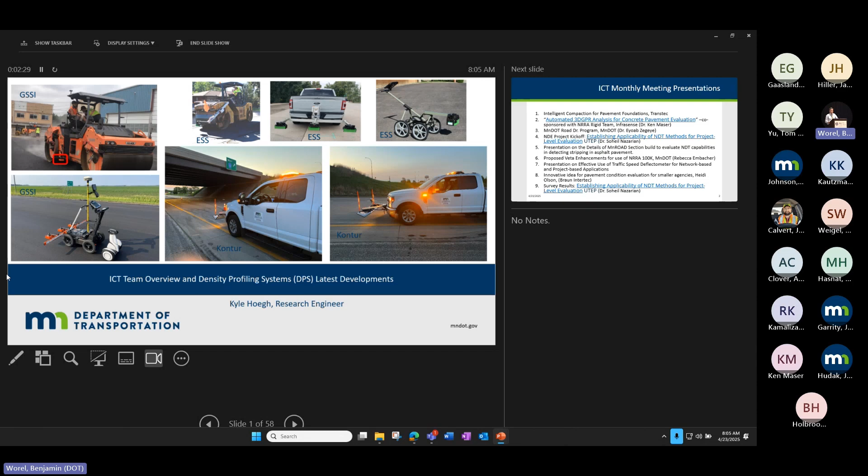So I'm going to talk a little bit about what you see on the lower right, which is we got out on the first project this year, the Kontur 3D DPS, as we're calling it. And then in the upper left, and also in the upper middle, you see that we're starting to get this DPS going on roller mounted systems. So just going to briefly touch on some of these developments.

I did want to mention that these are some of the presentations that we've done as part of our monthly meetings, and also really appreciate that we're starting to do those joint quarterly meetings, because I think that's what's important for our ICT group, is making sure the larger paving audience is aware of what the latest and greatest is. So appreciate the NRRA for allowing us to do that.

One project I wanted to highlight here was with the use of this new 3D Kontur DPS, and it's the same system, the 3D radar system that's used for a lot of other applications, but the manufacturer has got it to the point where we can actually use it to directly map the relative density on projects.

So there was a really good candidate here where it was night paving. It was a big project, and the only way we could get DPS data was using this system as compared to the cart-based system that we typically put out on projects. And it was a big project.

The other thing here is, I don't know if it was Dave Van Deusen's fault, or probably. Okay, we decided we were going to go no vibratory roller compaction, and we're going to waive any disincentives and expect to get a good product out there. So I don't know, but no, I'm kidding. So that is true, but we did it for a reason, because of the conditions out there, which I won't go into the details now. You can talk to Dave about that.

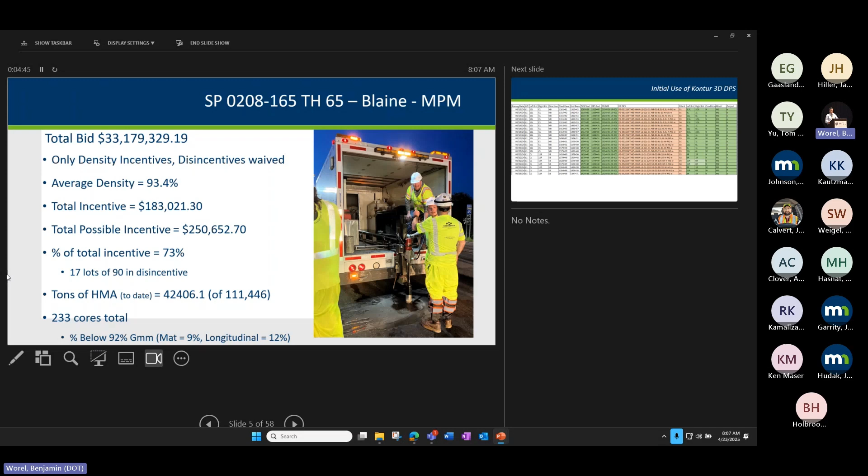Because of that, we wanted to have some sort of assurance that beyond just the cores we were using for incentive, that we were getting consistency out there. So that's kind of where we pulled in the DPS as a quality management tool.

Just briefly, it's really important with DPS in general, and especially on projects like this, the keeping track of where you're collecting. So in this case, we basically just went out there and did a pass on the left side of the road, and then on the right side of the road, and that gave us a map with the 3D DPS.

So the main thing we tried to do with this was to identify inconsistent areas, try to figure out where the anomalies are. And to my surprise, there really wasn't. It was a really, really consistent project. So I guess maybe Dave knows what he's doing.

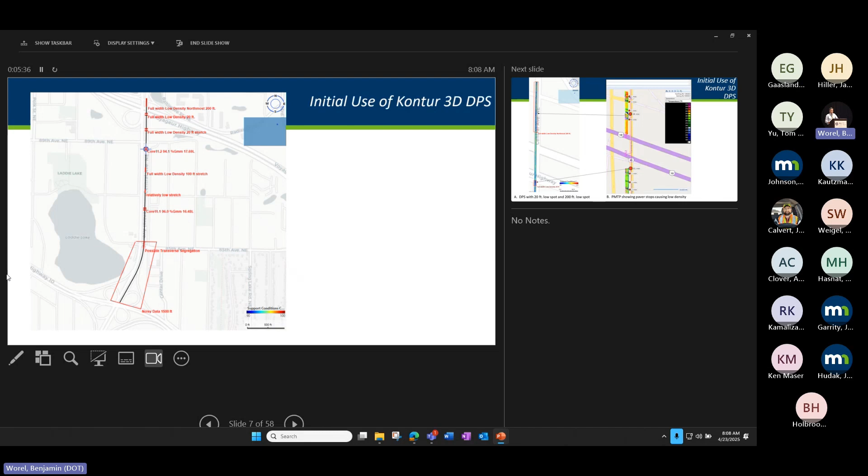But we did want to investigate some of these areas where we did see some anomalies with the DPS. So what you see on the left there is the 3D radar map, where when it turns blue up there, that means we're seeing a little bit of a dip in density. But we also had other ICT technology out there that we could confirm there was actually a construction reason for that inconsistency. So in this case, that actually gave us a little bit of confidence in this.

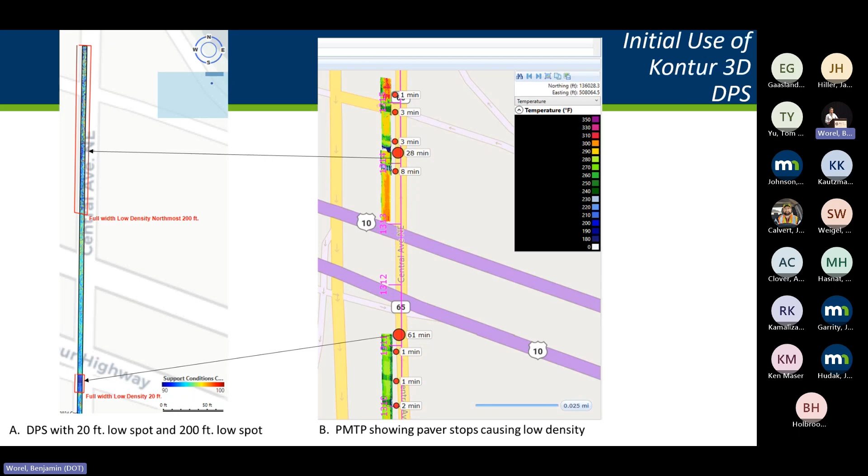Looking at the very few inconsistencies we did have, and comparing it with the other ICT, what we were seeing is whenever we had a low spot or inconsistency on this project, it was typically caused by them having to pull the paver and go do some turn lanes or things of that nature. So we gave that feedback to the contractor.

But the big story here was, despite no vibratory roller compacting and no disincentive for the contractor, they did a really, really good job. I think part of that was we specified 3 pneumatic rollers on the project. Is that right, Dave? Greg says yes. So whatever they were doing out there worked out really well.

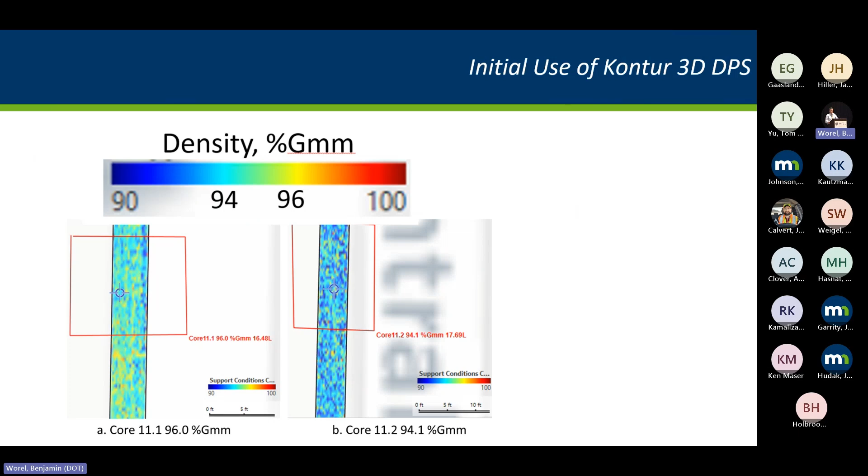This is an example, lower area, and they're still hitting 94% GMM. The good news here is, with just cores, we wouldn't have really known if it was a consistent project or not, even though we were doing some non-standard things. So it was good to get that out there.

This is a comparison of 3D DPS with our more conventional 9 passes that we do with 9 sensor passes, with 3 cart passes with our cart-based system. You can see here, this is just the center line, so this is 2 lanes where you see the drop in density on the unconfined side. It's really showing the same picture, just maybe a little bit higher definition on the left there with sensors every 3 inches instead of every foot and a half.

One of the good steps we've taken is you can take this distribution and get a lot of information out of it. Because we know air has a dielectric constant of 1, and that's not going to change no matter what project you're on, we've come up with a consistency measure where we can set a threshold for how much of a drop in density we're willing to handle on these 150-foot sublots, and use that as a means of trying to go beyond these cores every 500 tons or so, giving us more confidence in the product we're putting out there.

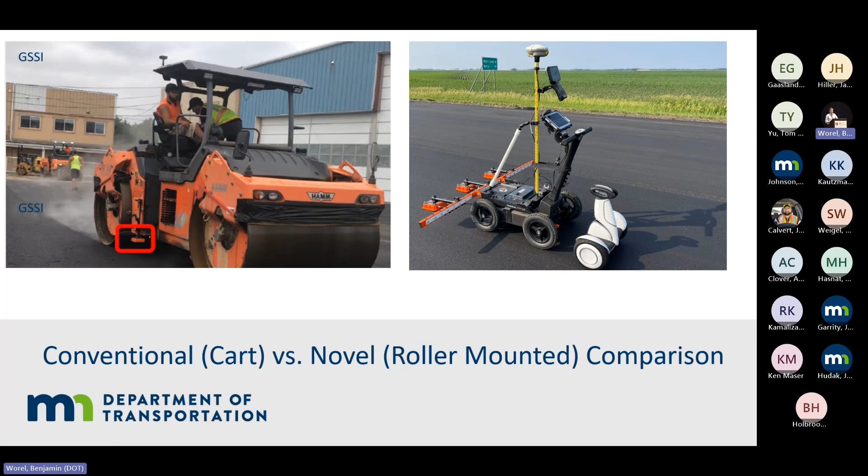I wanted to briefly touch on another recent development, getting the DPS sensor on the roller compactor, because it's great to have quality assurance after the fact, but if we can start to use this as a quality control tool, we can start to build it right in the first place. We started to look at this, and the initial results look good, comparing the cart sublots with the variability measure to the DPS on the roller compactor. You see a similar trend, which is good to see, and we're going to test that out more.

Which is good timing, because now we've just kicked off our phase two DPS pooled fund. We have 16 agencies, and we're going to tackle this. It was mostly research in the first phase, but now we're really going to go heavy on the implementations, where participating states will get this technology out there and see if we can improve on our current state of the practice for evaluating density.

With that, if I can advance to the next slide, I'll take any questions before we bring up Soheil.

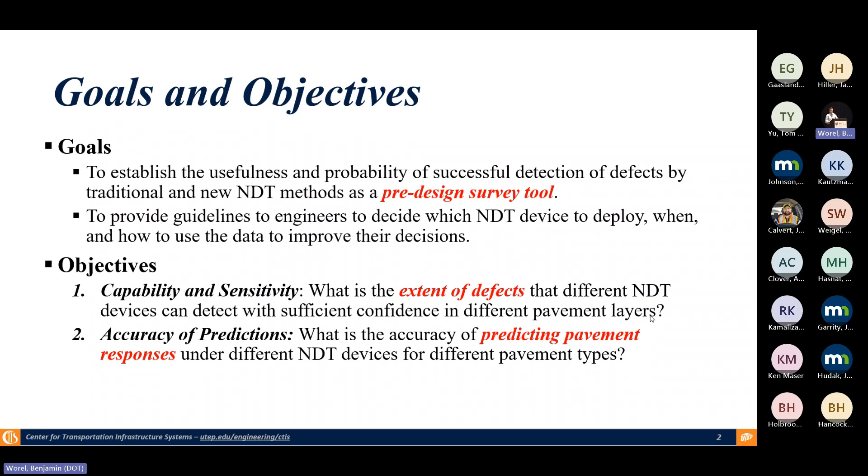Anyway, so I'm going to go Federal Express type of guy from now on because of the time limitation. I don't know what happened, but everything I pushed, it just goes back and wakes those guys up. Here we go, okay.

So the process that we're just trying to do is basically figure out what are the damage modes of interest to the community, what are the most prevalent problems you have. What's the deterioration process, just to see what happens and when it happens, before you start getting alligator cracking on the surface. How can we measure these deterioration indicators and how can we monitor the pavement to see when these are happening. So essentially we just try to catch the problem as soon as we can, so the device is helping us, not after we already see it on the ground.

Okay, so I'll go very quickly. You select the damage mode of interest. Here I'm just going to go with fatigue cracking because it's easy, everybody is designing for it. We can use any equation that you use. We chose to go with the 1-37A equations, MEPDG, Pavement ME equations, and look at it carefully to see what parameters you have.

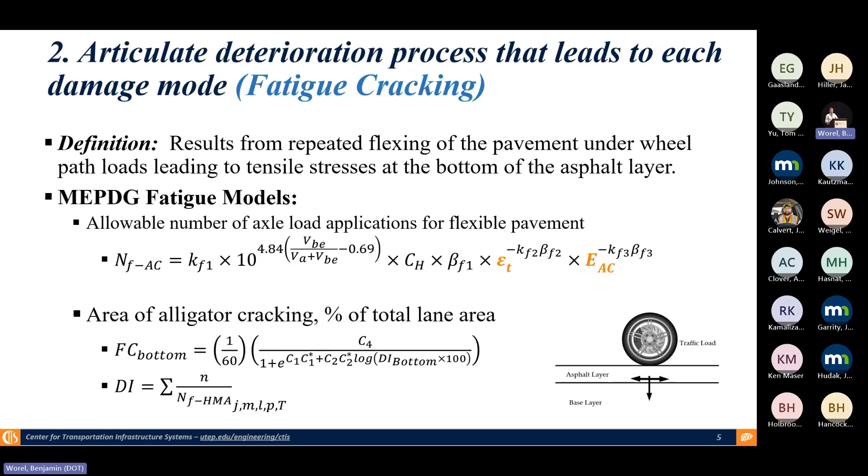See how these parameters affect the equation. There are a bunch of factors that we don't touch. One thing you have to do is have the effective air voids and the AC content, which you can get in the laboratory or with a core. There are two things we have to model: the tensile strain and the damage index in the equation. And there are only two things you have to measure: the thickness of the layers and the moduli of the layers.

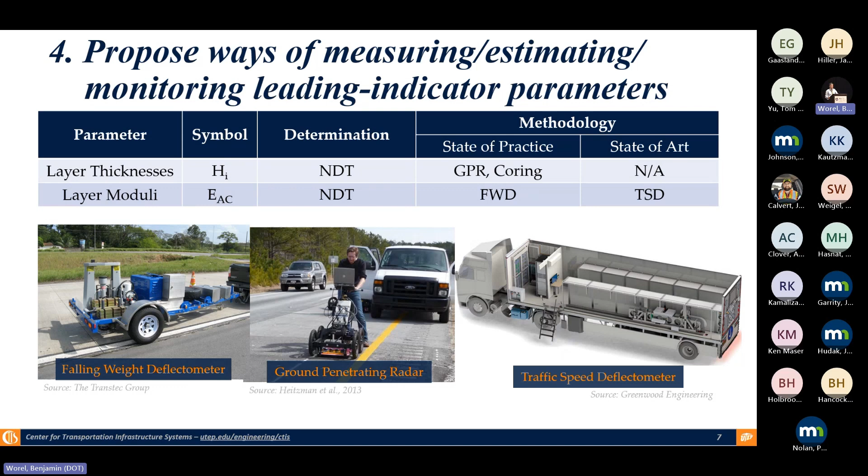So how are we going to do that? To simplify it at this moment, to get the thickness, the state of the practice is GPR or coring, and we're not aware of any state of the art coming in that area that we don't have. But for the layer moduli, the state of the practice is FWD, and the state of the art is TSD, the traffic speed deflectometer. So we go through a sensitivity analysis, a Monte Carlo simulation, and something called the impact chart to see what parameter is most sensitive in your design, what affects your design the most. Let's focus on that. If the thickness of the base doesn't impact your results, don't worry about it. But the thickness of the asphalt maybe does.

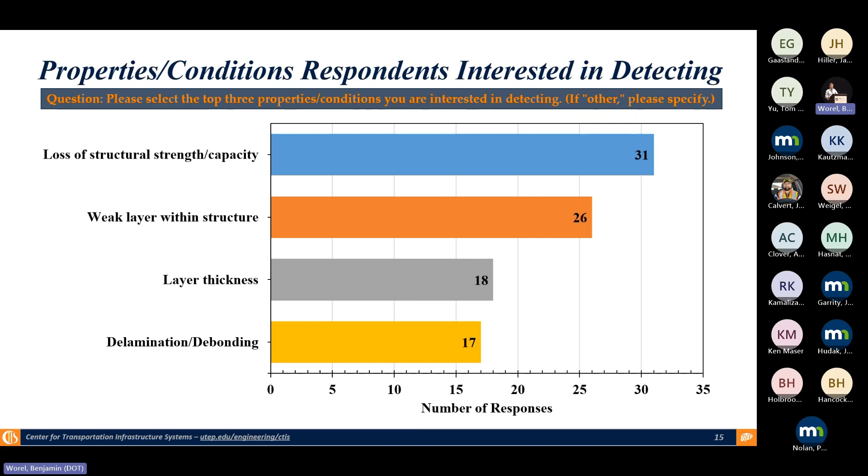So we're focusing on those properties and conditions: detecting the loss of support in the pavement, finding the weak layer, the layer thicknesses, and delamination debonding. Those were the characteristics we focused on. I'll skip some of this since it's for a 30-minute discussion. We're right now developing a test plan to go with those three devices and the four defects, and hopefully next time we'll give you some advice.

Okay, let me do the special slide. Just a question: how many of the audience know what the traffic speed deflectometer is? I'm hoping all the hands are up. So this is essentially what EOP showed yesterday—it's a device that goes at traffic speed and collects deflection parameters from the ground.

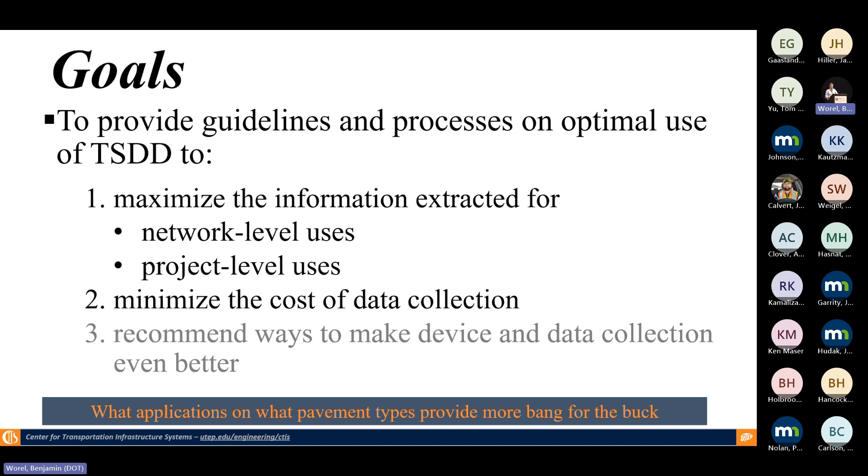So we are trying to maximize the information extracted, both at the network level and the project level. Right now, it's predominantly network level. We are hoping to get into the project level and minimize the cost of data collection, and give some recommendations to the developers of the TSD on how we can reconfigure the device, improve the accuracy, and do the other things we would like to do that we cannot do right now. So the focus is between the TSD capabilities and our desire for what we are trying to do with it.

So we found four uses for this device. The first one is essentially we do statistics. You just run the device and see what the anomaly is. It basically gives you a parameter, you do statistics and say this is bad, this is good. That's great for network level.

The other one is the overall pavement capacity. That's when they come up with some indices from the parameters they're measuring, and then correlate those indices to different things. This one is mostly spatial and temporal data - if you have several years, you can start working with it.

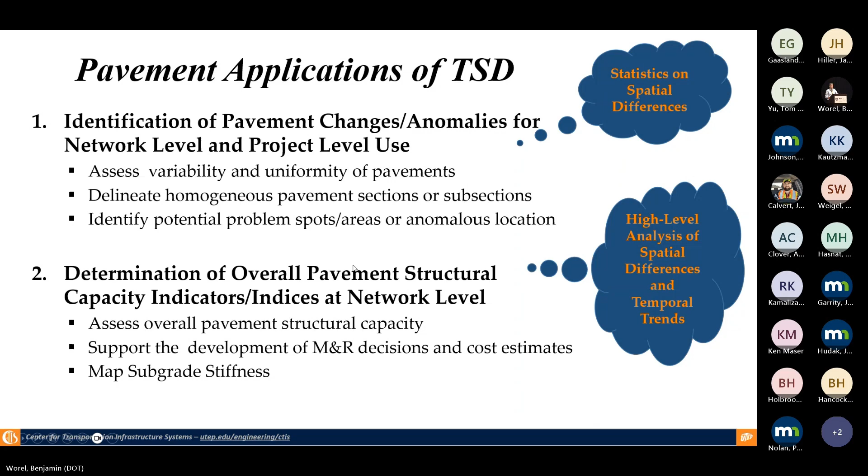And the third one is the project level. We just started touching it at the project level, trying to do structural capacity - that's where the pavement engineering comes in. Before it was mostly statistics and indices. Then load transfer efficiency, something that came up recently for rigid pavements. Our goal is to see if you can use it for other things besides finding if the joints are bad or good.

So to do these four things, we have certain parameters to look at from an accuracy standpoint. If you just want to see good and bad, you don't really need an accurate measurement - you need a precise measurement. But if you're trying to do project level, you need extremely high accuracy and precision. There are 10 criteria we are looking at, and we map it onto each of the four applications.

Again, a survey - basically what we see is that network level use is prevalent, project level 17 percent says both, but there is very limited use, though it's there and coming. Main interest, I don't know, fascination with delamination and debonding - I guess that's what we see all the time - joint condition in concrete, weak layers within the structure, and loss of structural capacity. You see there's similarity between this and the previous one - they're the same, just different groups saying the same thing.

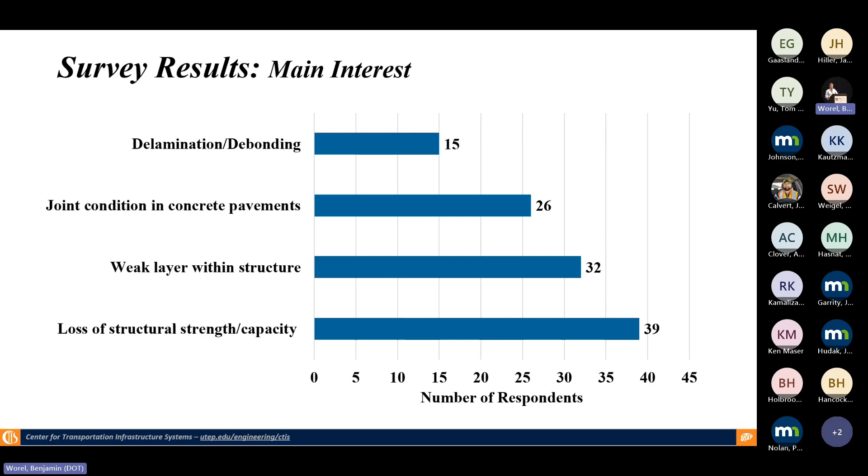The gap analysis, based on the survey that we got, we did the gap analysis, and it's based on three things: data collection and processing, network level application, and project level application. What are the gaps in these three groups? I had nice slides, but I'm not going to show them to you.

Okay, there are some caveats - I'll show you a little bit. These are not our opinion, these are your opinion. We are just, I guess, some people started shooting at the piano player - I'm the piano player, I'm just summarizing what the DOT said. Some of these are gaps because it's a new technology, and any new technology takes forever. There is a lot of intense research, a lot of experience, and then there are some problems common to all NDTs - it's not unique to this one. Nevertheless, we started doing a SWOT analysis, and I see we are running out of time.

So essentially the strength is that you can collect a lot of data - now we collect data at 50 millimeter, 2-inch resolution. And you don't need traffic control.

The opportunity is to reconfigure the sensors and things like that, so you can get more precise data on stiffer pavements, which is a weakness at this moment - as the pavement gets stiffer, there is less precision and more noise in the data, and we need to figure out how we can improve that.

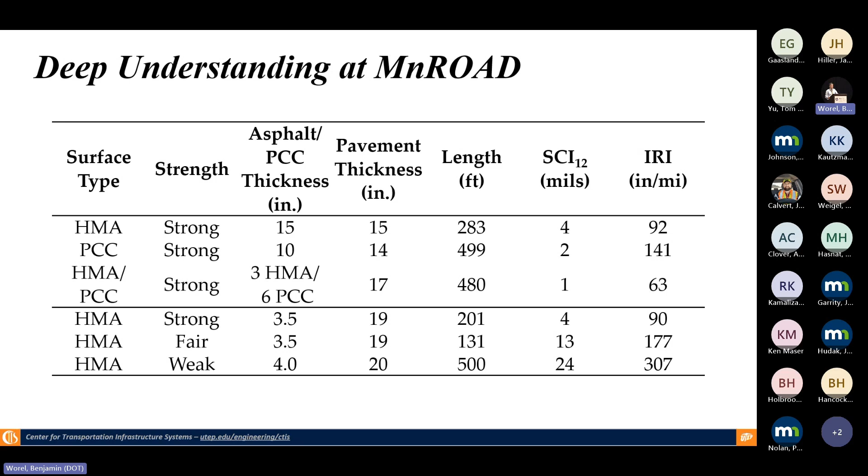So we call these six sites that start from the softest HMA all the way to very stout, rigid pavement. We have the signature of what the truck measurement would look like, and we are using those to deeply study all the issues we are considering, and that people are interested in.

So this is an example. We have sensors embedded in the concrete, and we just look at the measurement of the TSD and the sensors. This is a weak one, and the data is good. If I show you a stiff one, it may not look as good as this one.

And then we use the rest of the test sections to validate what we found from the deep ones, because there are different thicknesses, different configurations, different levels of distress, and so on and so forth.

We are lucky enough to have data from 2019, 2021, and 2025, so we got vertical coverage. We can see the progression of the deterioration on the sections that have been there.

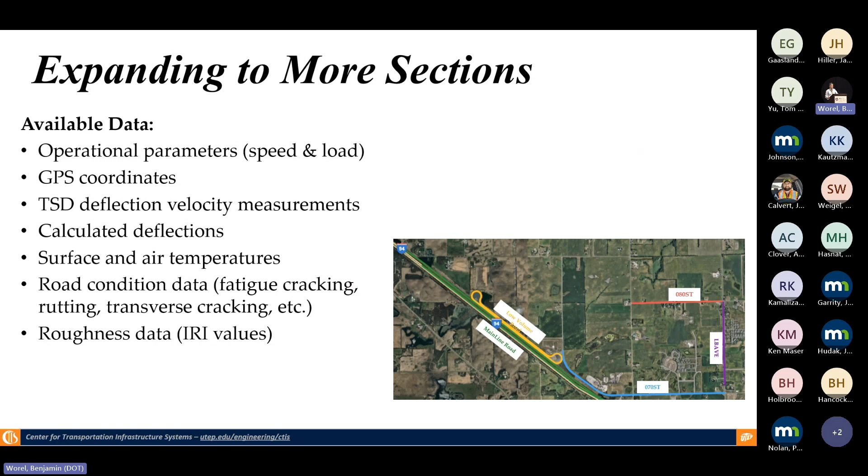We did some consideration of the different parameters, how they impact the measurements that you do. You see that the thickness of the base, for instance, is not the big deal. For the AC, you may want to run your GPR and get a good indication of the thickness. The GPR is integrated in the TSD.

For pavement, the moduli of the different layers - the sensors close to the tire are sensitive, the base as well, and then the subgrade modulus is the strongest indication. So you get a very good indication of the subgrade modulus. If you want to see what the subgrade is, you get good information, but not as good for the other layers.

We finally looked at 46 indices that people have used in the last 10 years for this, and these are the top five for each one of them. The criteria we have for the best one is just a very strong correlation to one parameter - deterioration of asphalt, base, or subgrade - and not being impacted by the other parameters when we do it.

And again, this would be 30 minutes by itself, right?

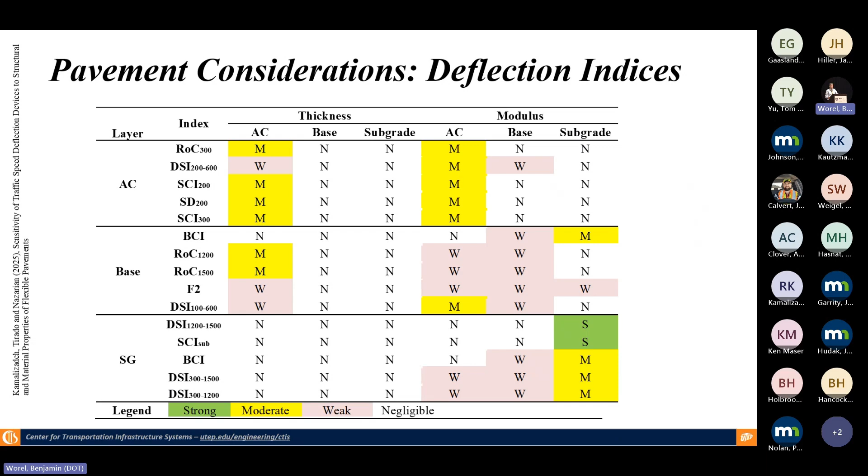Right now our highest priority is the network level - how to manage the variability and how to interpret the data so that you get the best information. The second priority is the project level, and then the third goal is statistics, which we are not going to touch. The last one is just basically something we're going to run out of time before we get to it.

So, with that, I'm done. Sorry if I ran long.

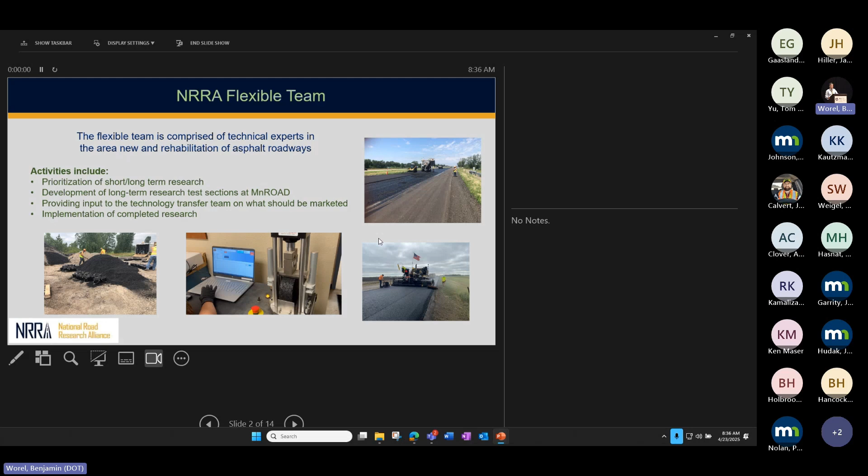Time - yeah, we are fortunate enough, we have three periods, every two to three years. That actually deterioration model needs time, and you want to make sure that it's consistent. So you know, if the pavement is deteriorating quicker, you want to get more replacement, so you want to make sure that you're accurate.

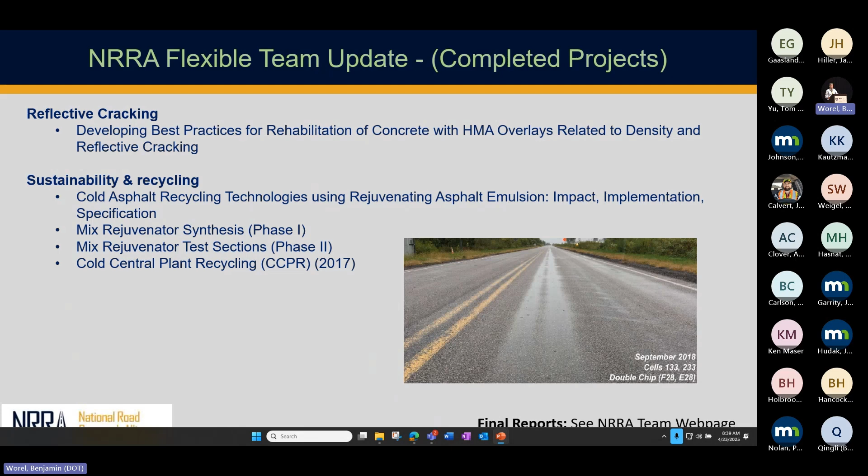We have about 25 projects now on our website, all under the 4 categories I have here. Within those 25, we have about 10 completed projects, and also a couple of projects that were completed but extended, since they both had test sections we wanted to continue evaluating for performance. We also co-sponsor research projects with other teams like preventative maintenance and ICT, and we have exclusively flexible projects too. So we have about 7 ongoing projects in different progression of completion, and also a couple that are in the development stage now and RFP stage.

One of the things we did this last year was there was some available funding, $100,000 per team. It was left up to the teams how they wanted to have some latitude in how to solicit proposals for them.

So the Flexible team took a similar approach to the call for innovation we had a couple of years ago. If we recall, we actually solicited needs from the agencies, and once we got the needs, we forwarded them to the associate members, and then they come up with proposals.

But in this case, we sort of skipped that first step, and just solicited all the members for proposals. Once we got the proposals in, we sent them out to the voting members of the agencies and asked them to pick the top 3. Once we got all that information in, we submitted to the executive committee. In the end, we had 14 proposals submitted, flexible team proposals.

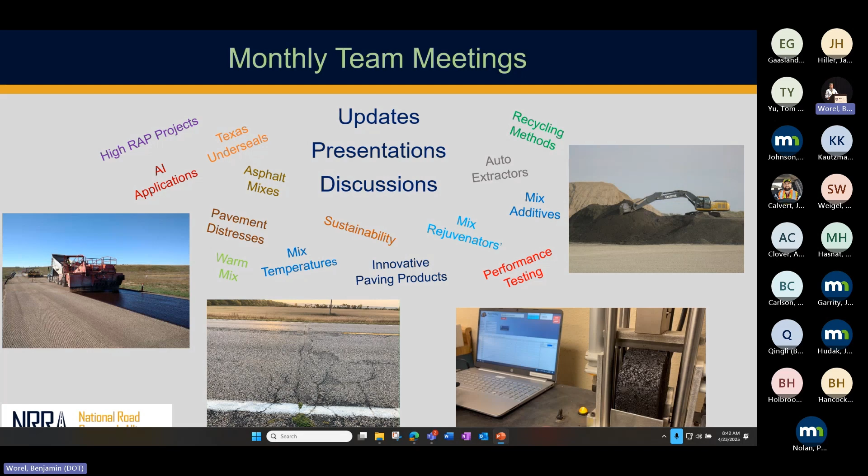In the not too distant future, we're going to have tools for overlay, for reflective cracking, so we can figure out what mixes and additives to use to resist reflective cracking and thermal cracking, guides for perpetual pavement design and construction, and balanced mix design, which runs through the whole thing here.

It kind of relates to everything we're doing, and being able to account for the aging of the mix and the warm mix technologies, recycling agents, having a guide for recycling agents and rejuvenators, being able to figure out how much effective binder we have in the RAP, and cold asphalt technologies, ways to make our joints and rumble strips more durable and better milling capabilities. So we've got a lot of stuff we can take back because it's all directly related to the agencies, all this research.

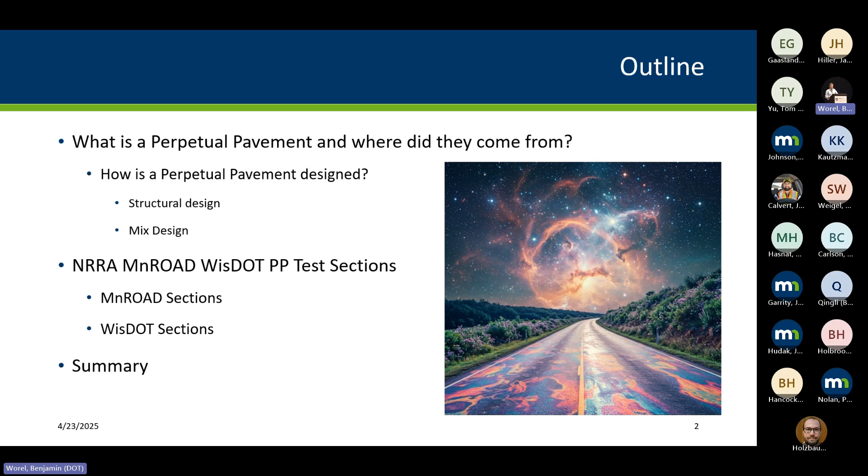So in general, what is perpetual pavement? This isn't a new concept. There's been kind of full depth or deep strength asphalts for a long time. And then going through the literature, you start to see the term perpetual pavement start to appear in the early 90s.

Especially for us here in Minnesota, you can't really talk about perpetual pavements, and even nationally in the US as well, without mentioning Dr. Newcomb and his work here at the University of Minnesota, and then as he moved on with NAPA and then TTI. But again, his first paper from 2001, the first line is, the concept is not anything new.

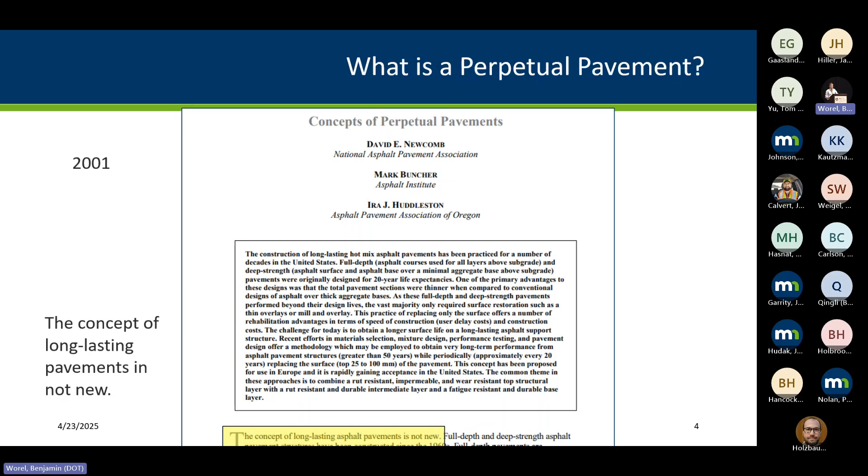So digging a little deeper into some of Dave's work, it really is designed and built to last 50 years with only a slight maintenance every 20 years from the surface itself. And this is accomplished in multiple aspects of the project, being material selection, mix design, structural design, and performance testing.

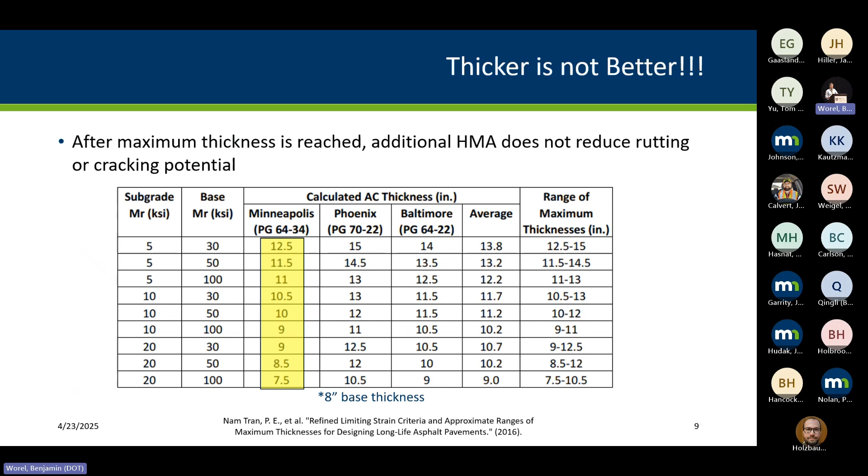Additional to that, there is a cap on the upper limit of kind of asphalt pavement or thicknesses that you need. Once we get thicker than this, you're really not getting a benefit. I want to point out these thicknesses, especially for the Minneapolis region. It goes anywhere from 7.5 inches of asphalt to 12.5 inches, and you'll see how that kind of plays into the sections that we built.

So the sections that we built in 2022 with our MnROAD mainline reconstruction, we built 2 perpetual pavement sections at MnROAD.

The following fall, we built 2 more perpetual sections, or instrumented 2 sections that WisDOT built on I-94 in Osseo, Wisconsin, about 2 hours east of here, just under 2 hours. It's close enough that we can go with our MnROAD team and do regular monitoring and data collection there, and it's also the same stream of traffic with those sections. So we have the same instrumentation in different structures in different states, and our MnROAD team is collecting the data.

The MnROAD section has 8.5 inches total asphalt over 9.5 inches of base. The other sections that we built at MnROAD that year, that Ishan talked about yesterday, are 6 inches of asphalt over 12 inches of base. So all we did in the design here was change from 6 inches to 8.5 inches and then trimmed the base up a little bit, giving us a nice thickness comparison between those sections.

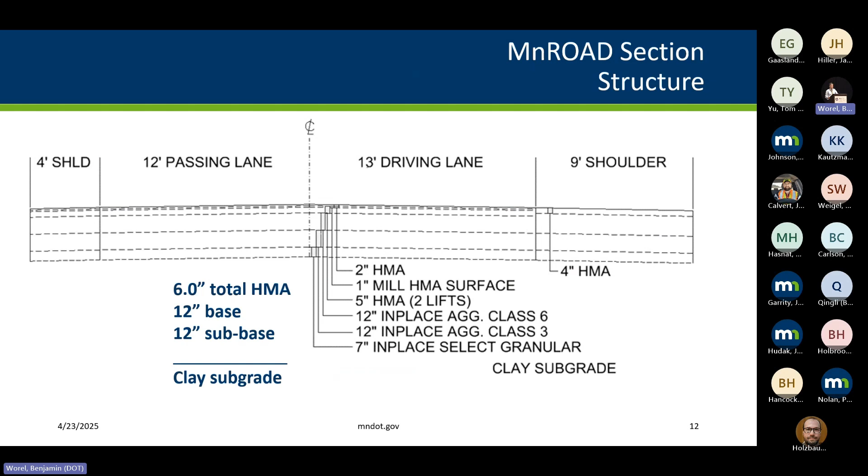On individual mixes selected, I won't get too much detail for the sake of time, but the general concept is a high quality surface. We used an ultra-thin bonded wearing course for the MnROAD sections. For the stiffer layer, we increased the RAP content on that middle lift, and on the bottom layer we added 0.5% extra binder to give us a little extra flexibility. All of these tweaks were done within the contract, within the special provisions themselves, and we didn't get any pushback from CS McCrossin, the mix designer or the contractor, on making these small additional RAP tweaks or additional asphalt contents.

It's not going to be a perpetual pavement if it's not constructed properly. We really have to emphasize the importance of using all the tools that we do for construction, because with a perpetual pavement you need it to last a lot longer, so any little flaw is going to be amplified over time. You've got to get it right the first time, so construction quality is very important.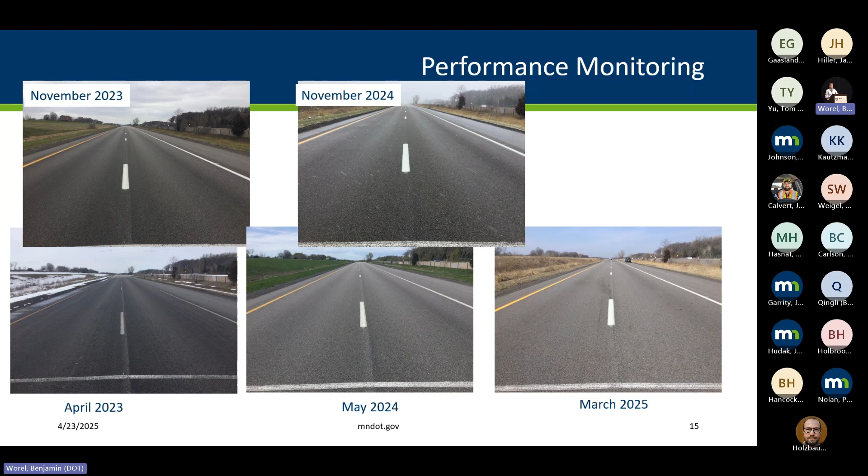Our routine performance monitoring, you've seen a lot of shots and images and distress surveys from MnROAD. The takeaway of this slide is we're looking at the same thing over and over and watching as distress progresses over time in these sections.

We're also monitoring structural performance at MnROAD with the FWD and then with the dynamic sensors, which I'll show here. So we have strain gauges and pressure plates, same layout for the Wisconsin sections, where we have strain gauges in both the longitudinal and transverse direction with traffic, and then pressure plates on either side. The pressure plates are located at the top of the base as well as the top of the subgrade, and these long vertical pipes going down are our thermocouples, which measure our temperature.

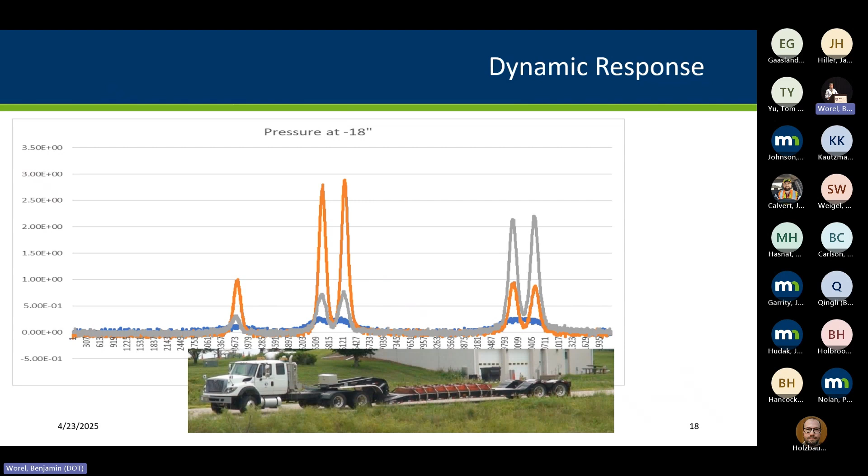Here's an example of what we're seeing: this is 3 pressure plates all laid on top of each other. You can see the furthest one inside was that blue line on the bottom, not a lot of response. The gray is the next one inside, and then the truck is directly over the orange spikes that you see.

One of the cool things about the MnROAD section is the collaboration we did with the PM team on the wicking geotextile. From a perpetual pavement standpoint, this project really means we got extra environmental monitoring of the conditions, more in-depth analysis of the structure. It's the same structure I was showing earlier, with 8.5 inches of asphalt, but the big difference here is now we have a geotextile fabric at the bottom, plus some work in the shoulders to tie in the fabrics.

This is what the geotextile fabric looked like. The cool part for me is the additional moisture testing: they put geotextile fabric in half the section and no fabric in the other half, where our dynamic instrumentation is. We have moisture sensors going all the way across the pavement above and below this geotextile fabric, and in the control section we also have moisture sensors going all the way shoulder to shoulder across the pavement.

Moving to the WisDOT section. These were constructed in fall of 2023. I believe, Sinan, the whole idea of the perpetual pavement NRRA section came from someone at WisDOT who saw we're building 12 inches of asphalt here on a bridge approach. We should use this opportunity to look at the response under 12 inches and update our perpetual pavement or deep strength design strategies. So kudos to WisDOT for initiating this project.

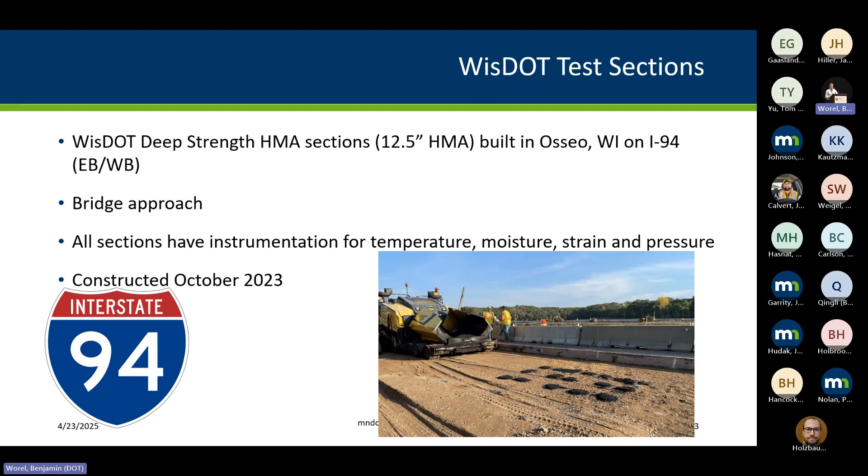It was really nice working with Sinan, Mohammadhossein, Pete Kemp, the whole WisDOT team, collaborating with them. Here's Pete in this picture, taking a picture of somebody taking a picture of Sinan and I working. Really good, unique collaboration that we were able to do with WisDOT, and we're looking forward to getting the results.

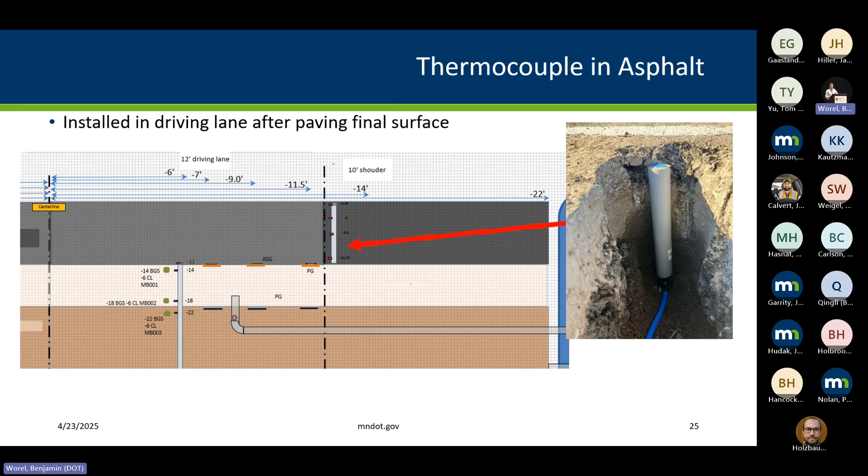So this is a cross section of the thermocouple we installed, right after the surface lift of the pavement. We core in through the asphalt and then put in our temperature tree that's measuring. Really what we're focused on is the top of the asphalt, the middle of the asphalt, and the bottom of the asphalt, so we get a temperature profile for our dynamic responses.

Wrapping it up, perpetual pavements are a tool, especially as we focus on longer lasting or more environmentally friendly mixes. I really want to stress not to lose sight of the overall performance. What might take a little more money in design or embodied carbon in design and construction can pay off if we're able to make longer performing, longer lasting pavements. With the little exercise we did here at MnROAD, we changed 2.5 inches of base and changed the design life from 20 years to 50 years, being a perpetual pavement.

Like all of our projects, it really is a full team at MnROAD to get all of this done. I've already mentioned a lot of the Wisconsin team - I think I owe Pete some cheeseburgers that he bought for us during the construction day - and then great contractors on either side being able to work through this project.

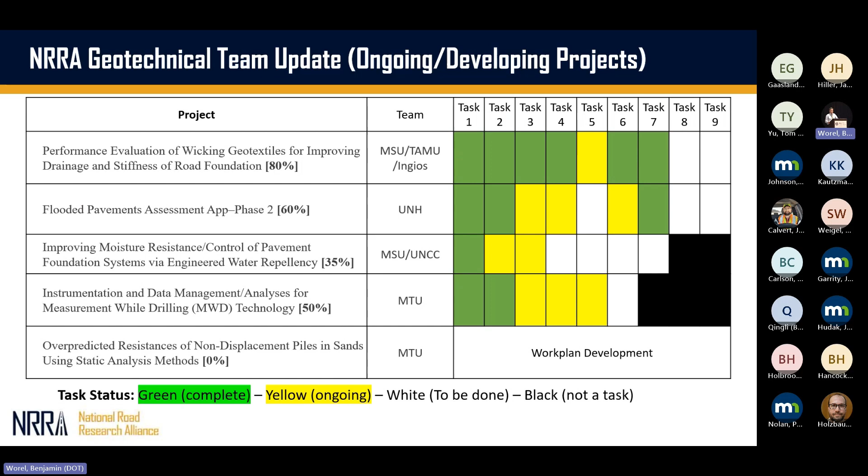I really like how the membership of the team is moving towards other topics that are non-traditional - related to geotech assets that are still part of the right-of-way, but not always just sub-base and foundational layers. We are starting to branch out into other assets within the realm of the geotechnical engineer that are still part of the right-of-way. I really appreciate our members pushing in that direction.

And then other activities and collaborations I want to highlight - Ben has been asking us for months about the additional benefits. So I listed some of the unquantified benefits not directly tied to projects. Our members realize there is a lot of expertise in our team, and our members are very cool and friendly, always open to help. I've listed some of those here.

We recently assisted North Dakota DOT as a team in the implementation of LWD for quality assurance. We are helping them navigate that implementation process. Terry has been using this team for years to inform and help him make decisions for changing specs.

The most recent one, he wanted to know what other states have in terms of specification for the Los Angeles abrasion test. Currently we have a lot of issues with environmental aspects in terms of resource availability for aggregates. We're having a hard time finding good quality aggregates across the metro area. So we're starting to brainstorm the idea of maybe reducing some of the high standards we used to have for some tests to accommodate that issue, trying to be open-minded about using less quality aggregates. That's one of the things we're using memberships to get information on.

Another one was assisting interpretation of intelligent compaction on pavement foundations for Illinois Tollway. It can be very complicated, as was mentioned during the ICT team meeting presentation. Getting that information could be overwhelming, and interpretation of the data could be very difficult. So the team is trying to help inform practitioners on the use of IC technology for pavement foundations.

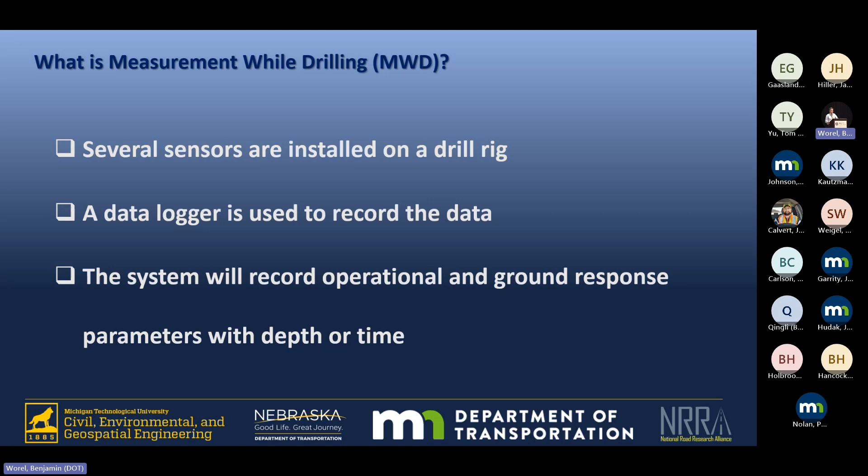We put the sensors, and obviously we need a data logger to record the data, and then the system of sensors and data logger is used to record operational and ground response parameters with depth, or time, or both. So that's the whole concept of measurement while drilling, or MWD.

But what is the goal of measurement while drilling? Broadly speaking, we have two major goals that we hope to get from all these measurements. The two major ones are to optimize the drilling operation itself.

When you're drilling into the ground, you have a certain rotation speed, and you're putting a certain pressure on the drill bit to push it into the ground while it's rotating. Using the data we collect while drilling, we hope to be able to optimize that drilling and do the same drilling with the minimum energy used.

And it's not just about the energy. If you drill with an optimized method, you could also reduce the wear and tear of your equipment, your augers, your drill bits, and everything. So that's one of the major goals of these MWD projects.

And the second one is to improve the subsurface characterization, or site investigation. Right now, while we're drilling, the common practice is that as you're drilling into the ground, the soil comes up, so you could use that soil to identify the different layers in the ground. But that's pretty much all you can do with the soil that comes up, because that soil is disturbed. The same soil could have different properties depending on the state it has in the ground.

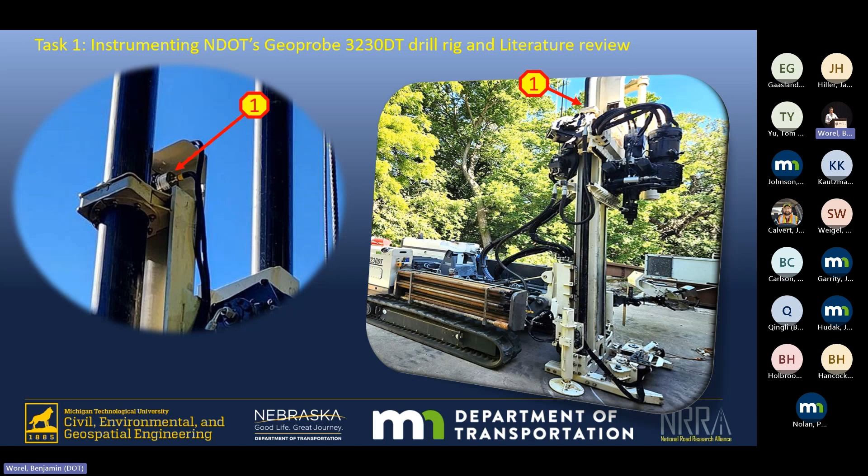Then I have a gear tooth stack at location 2, which is used to measure the rotation speed of your drill bit. Then at location 3 on the hydraulic lines, I have 4 pressure transducers, 2 of them used to measure the head feed pressure, and 2 for the torque pressure. Those 4 sensors are used to calculate the down pressure and the torque on the bit.

And then I have 1 more pressure transducer at location 4 that's used to calculate the mud pump pressure, which you could actually use to calculate the mud pressure being injected into the hole. And then the last one is another gear tooth stack that's used to measure the pump rotation, which is then used to calculate the injection flow rate.

Okay, so those are the 6 measurements - remember the 3 gives me torque and down pressure. So there are 6 measurements that we'll be able to do for Nebraska DOT, the minimum ones for mud rotary.

And this is the data logger I was talking about. This is a commercially available data logger by Limb Company, the pocket limb version. We installed and connected all those sensors to this data logger, and now while we're drilling, we could collect all 6 parameters.

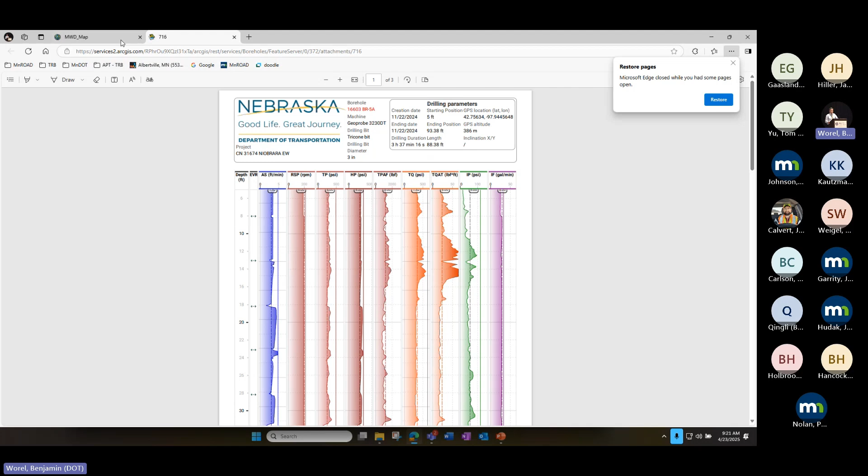You could actually store files at this location. For example, if I click here, it gives me the measurement while drilling data recorded there, this is the PDF. If I click the other one, it downloads the Excel file of the same data. This is just an example - we decided to put one PDF and one Excel file here, but we could do as many as we want, there's no limit for that.

So this was the second pass. I think it's a very neat way of organizing this huge amount of data. Now everyone can go there and look at whatever data they want and collect it. Eventually, I don't know if it's in the purview of this project, but later on we're going to add correlations onto this web page as well.

You could get your measurement while drilling data, put it into interactive software on the web, and get whatever parameters you want. That is my hope for the future.

So that was the task. Did I mess up something? It's the computer. It switches to presenter mode, and then I can't see it on mine. Oh no, thanks. Yeah.

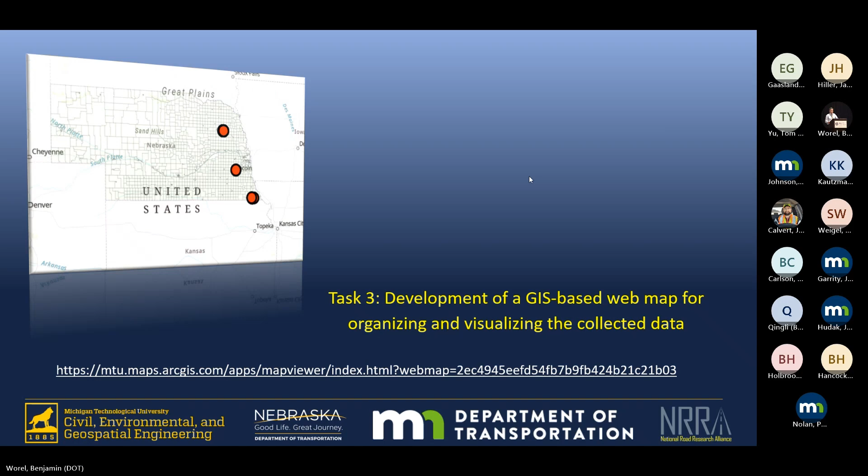Also, the measurement while drilling data comes in, then they have a separate PDF with all the in situ data, soil types, bore logs, and lab tests if they pushed Shelby tubes, compression strengths. We have to combine all of them into one Excel file like this. This is another huge part of this project, combining all of them into one Excel file.

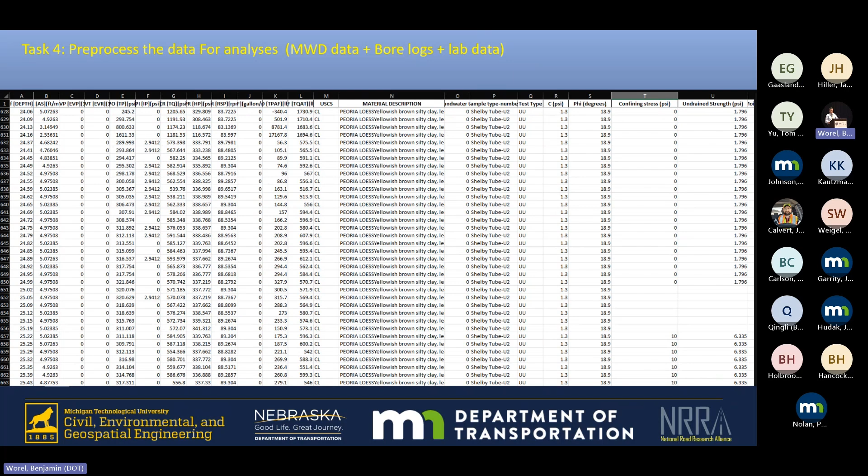Now you could use this Excel file to actually improve your site investigation. So that's what task 4 is. We're heavily working on this, pretty much up to date, and we were able to automate as much of it as we could, but there's still a little bit that you need to do by hand. That's the time-consuming part of this whole thing.

Another pre-processing thing we have: some of this project also has CPT, and we wanted to see the correlation between CPT and MWD. Combining them in one Excel file is not that easy, because although both record data with depth and time, the intervals they're collecting data at don't always match. So you have to do a little work to combine them, but this is fully automated because measurement while drilling comes in an Excel file, and CPT comes in an Excel file too, so we wrote code that automatically combines them.

It's fully automated now. The main focus, the part I really like about this project, is actually sitting down and analyzing this, trying to find correlations. The way we use measurement while drilling, the most common approach is combining all the raw data into compound parameters—we have about 11 of them—and trying to correlate them with different properties or soil types. One example is specific energy: all those variables in the equation are raw MWD data, combined into one parameter that you can plot against depth to see how it correlates with different soil types, SPT numbers, and similar properties.

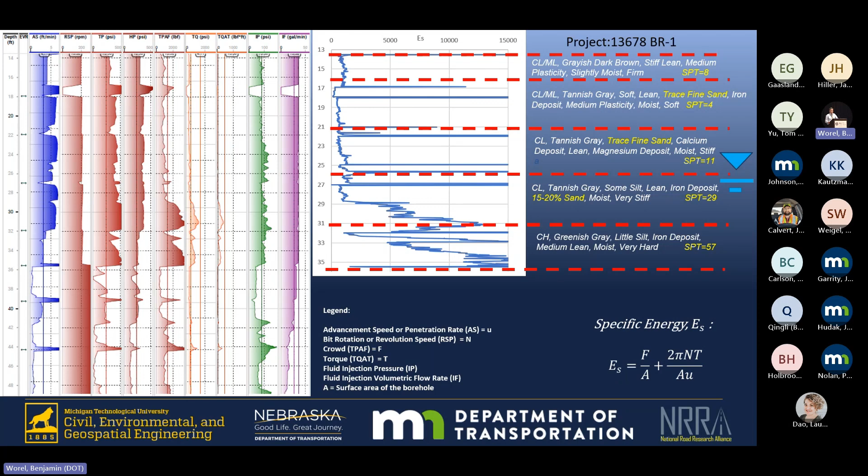Another issue is the scale is a lot different. Look at the first 25 feet of this data—it all seems pretty constant, right? But that's because when you go deeper, you go into shale, labeled CLCH, but it's actually shale—kind of a rock or intermediate material. So the overall data range is actually much higher, meaning you can't see those variables clearly. If you tried to do this in Excel, it would be very painful, so we automated it with a Python code.

Now it can calculate the specific energy, or any of the other compound parameters, and plot them versus soil type. Then you can automatically zoom into the one section that's out of range compared to the whole dataset. We did the same thing for USCS classification instead of the full material description.

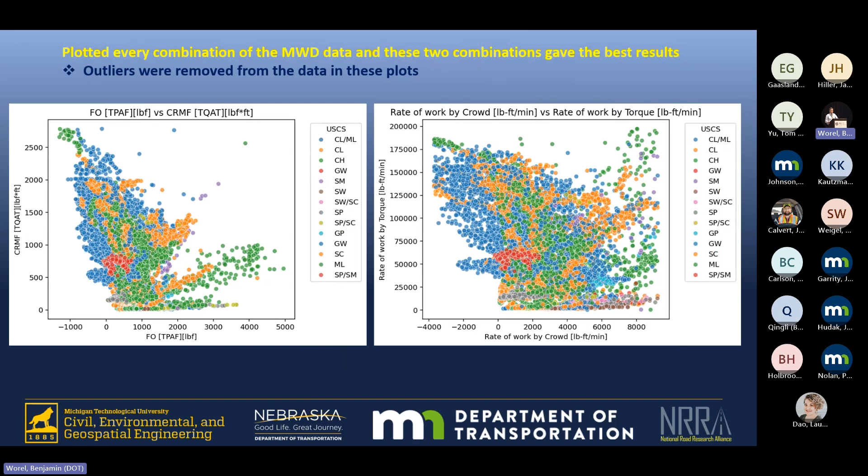The issue with using individual or compound parameters is that there are certain important things you cannot take into account, like the effect of the groundwater table. Some measurements are above the groundwater table, some are below—they're completely different animals. The effect of depth, confinement pressure, and the drilling procedure itself have a lot of effect on this data, but none of that is considered. Additionally, if you're doing hollow stem auger or mud rotary, none of these compound parameters actually take into account mud pressure and flow rate, which are important in the calculation. So what do we do?

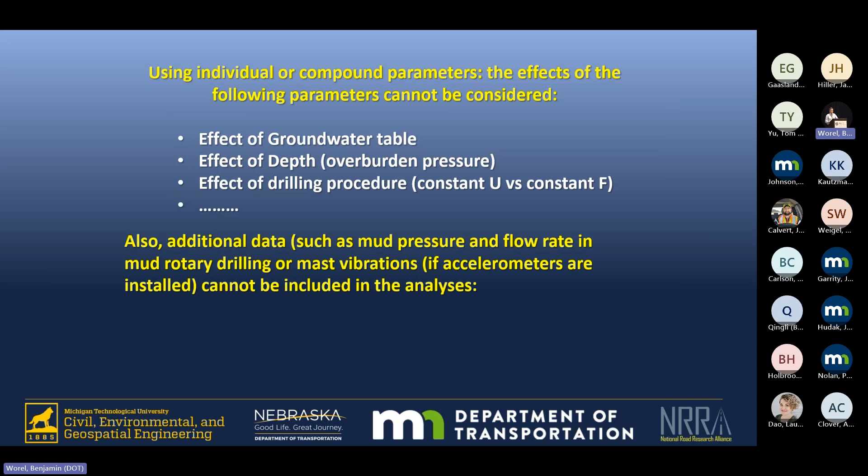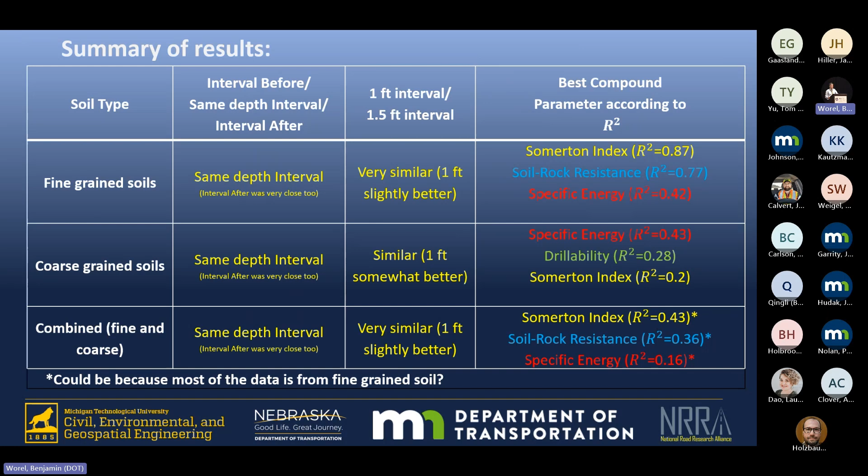It's promising. The next step was to develop correlation with SPT. I'm not going to go over all the details, but I looked at five of the compound parameters. Again, regular correlations do not seem to work well. The best I could get, if I separate samples into fines and coarse, is that the Somerton index has a decent coefficient of determination, but without manually separating soil types, the coefficient isn't good. Going back to machine learning, instead of using just two parameters, I used nine input parameters, and the coefficient of determination went up to 97%.

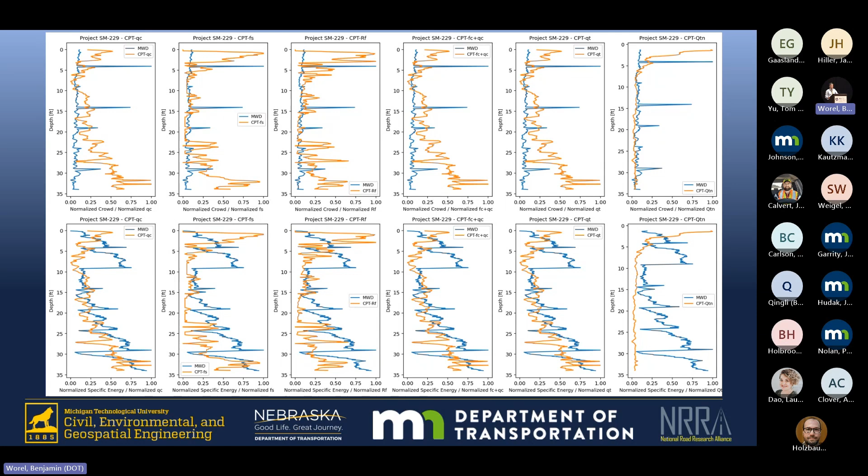We also developed correlation between measurement while drilling and CPT, again trying traditional methods first. There are some similar trends between CPT and SPT when looking at combinations of different parameters from measurement while drilling and CPT, but no real correlation—I could not find any. Going back to machine learning, using nine parameters instead of two, I was able to get a coefficient of determination of 0.9 between measurement while drilling and tip resistance, side friction, and even pore pressure. So there's really good relation—you can get good correlation between measurement while drilling and the parameters important in foundation design.

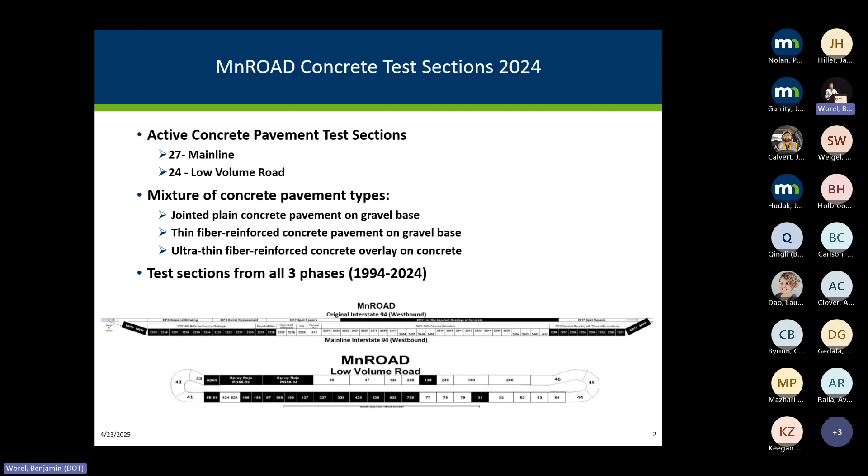We do have test sections from all three phases. We still have some originals from 1994, and that would be sections 36 and 37. If you go on today's tour, you can go out there and see those still holding up very well.

A lot of talk again - our major initiative is lower carbon content concrete pavements. Out of that we have 4 different active research projects. 3 of those were initiated in 2022, and we heard updates on those yesterday. For the sections we built last year, we just initiated a new project this year, the Innovative, Sustainable, and Durable Materials project, which covers those additional 8 materials that we're looking at.

Last fall, we also had the opportunity to place some Belitic calcium sulfoaluminate cement - a rapid set mixture - on the low volume road as a trial, to get some understanding of how that operates in a cold climate here. We really tested it; the placement temperature was 35 degrees when they put it down. I don't know if that was their coldest placement, but it really pushed the limits, and our thermocouples show that within 2 weeks it had frozen already. So it'll be very interesting to see how this performs in the climate at MnROAD here.

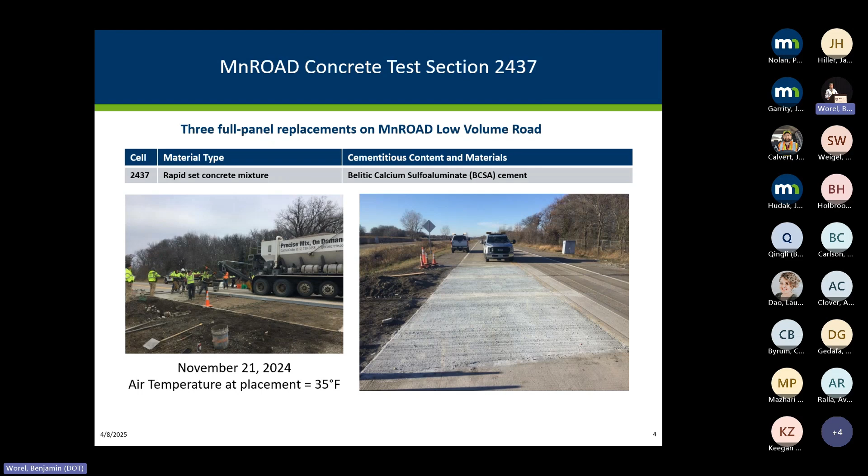As far as active projects, we have a number of them. I'm actually involved in the first two here as PI and co-PI. The first one is early loading to increase joint development of thin concrete overlays. The idea is that sometimes when we saw 6x6 panels, they don't all develop, and we're wondering if there are techniques that could be applied to encourage those to develop, because we're really kind of relying on that for the design.

Another one we heard about yesterday is utilizing the performance engineered mixture repairs and the diamond grinding of thin concrete overlays. Those two projects are kind of ongoing. Those are internal MnDOT projects.

Then externally, related to NRRA, we have a new one: automated 3D GPR analysis for concrete pavement evaluation. How can you take these 3D GPR images, specifically on concrete pavement, and speed up that analysis so it's not so much manual labor?

That project's active. We're going to hear shortly from Tara about reducing embodied carbon with the Microspheres project. And then we have the concrete construction report, which reports on the early findings from the 8 sections that were built last year. That's being done by Larry Sutter.

Should have those results, I think, Maria, if she's still in the room, should be having those results coming out pretty soon. We are also internally working on the construction report that reports on all the activities we're involved with as we build these test sections.

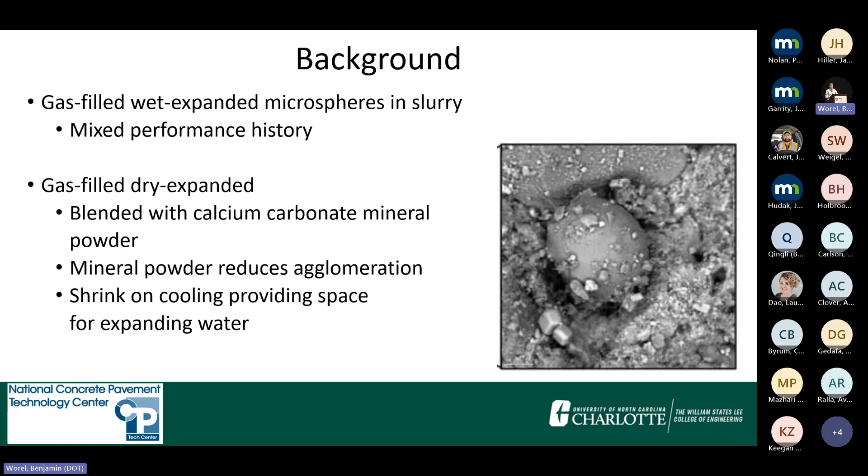So I'm going to talk a little bit about the implications of that in the next couple slides. But essentially, we've all known that, especially in places like this, even in North Carolina, we cross 32 degrees multiple times a day. Sometimes we do experience freeze-thaw distresses down south as well.

Essentially, we all know that some fly ashes, particularly those with high carbon, are giving us challenges. We have a lot of ashes that are marginal or problematic, and microspheres might be a tool in the toolbox. We're not talking about this product revolutionizing the entire industry because there is a cost associated with it. But that being said, if you have a good supply of a marginal ash, and you can get your freeze thaw durability by adding these microspheres instead of dealing with the issues of an inconsistent entrained air void system with conventional air entrainers, it could be a solution.

Secondly, from a sustainability standpoint and also an economic standpoint, if you're going from anywhere from 5 to 8% air, as I tell my students, the compressive strength of air is zero, right? But now you have 1% air by volume of these microspheres. You've gained back 5% by volume, essentially, that you can put something else in that mix that holds load, reduces permeability, does the job of concrete, right? So you get some space back in that matrix. That's part of what I'm going to talk about today too: an ability to reduce clinker content, reduce permeability, and get the same strength at a lower cementitious materials content. So it offers that advantage as well.

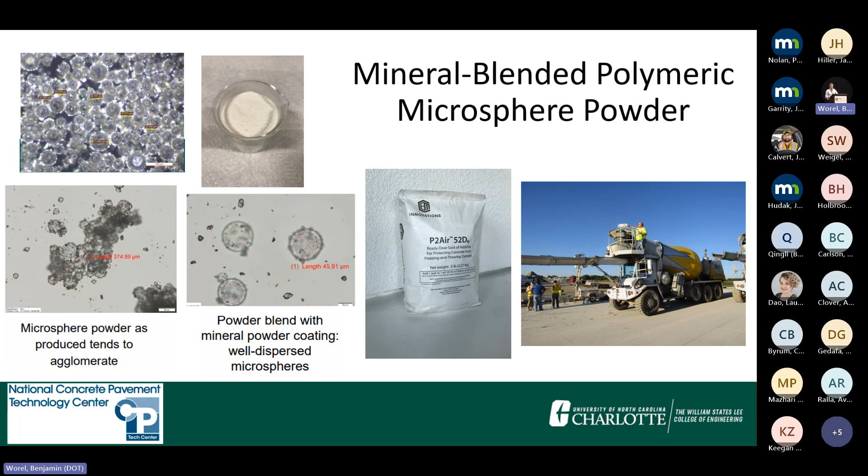The product comes in a fairly easy to use format right now. Essentially you put 5 pounds of the material in per every cubic yard. 5 pounds of something that weighs about nothing is kind of like throwing your bedroom pillow into the back of the truck. These bags are super light, and you put them in the top like that. Right now, the technology â there's actually some publications in the ACI journals on how to compute the required space, but for a lot of mixtures that's sort of the proportions we're using right now. This magic number of 5 pounds per yard seems to be the number.

The bag dissolves, and essentially they're working on a technology to either dose the bags at the batch plant or potentially have it pre-mixed with cement if they're looking for a long-term supply solution. That current cost is about $8 to $9 per yard. They're also working on getting that down as well.

How do you actually see these, and what kind of QC can you run? The interesting thing is you can't use the pressure meter because they'll actually pressurize and then you're not going to read them. But you can see them in the volumetric air meter â you can literally see them in the column there. So you run your volumetric rollometer. My student Rohan â people have joked he's the fastest rollometer user in the country right now because of the number of times he's been doing this. You just can't add the alcohol to bring the foam down, because the alcohol will dissolve the microspheres. But the foam doesn't matter, because you're literally looking for 1% in the neck of your rollometer to show you the microspheres are there. So that's kind of how they work.

What do they look like? There were some emails flying around a little bit ago about how do we see these under a microscope.

If you look at about 200x, you can see them. For those familiar with looking at concrete under a microscope, this is about 1 millimeter - that's your conventional entrained air void from an admixture. These are your microspheres. They are super small, and if you think about how they're accommodating that freeze-thaw pressure, being only 1% by volume, they're much more well dispersed and closer together.

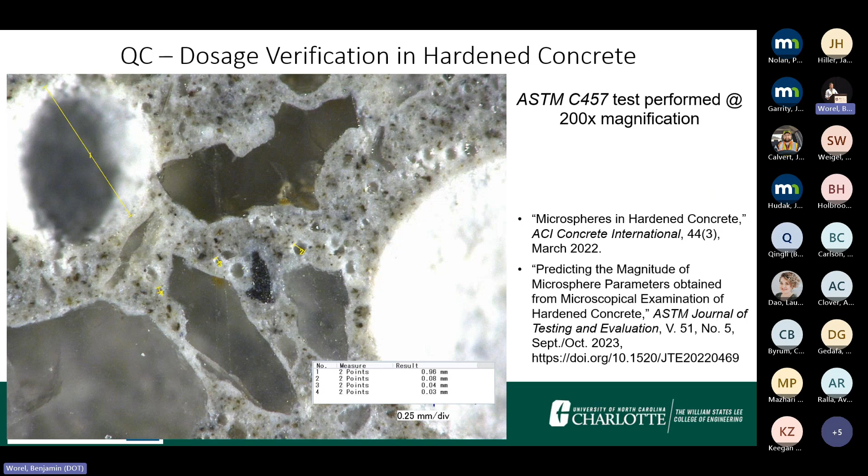You can do an air void count with them. They're tricky to see, but you can see them at 200x. So that's sort of where they are.

We've done some work at UNC-Charlotte prior to MnROAD, and that's sort of the proof of concept we did. I was approached by a ready mix supplier in the Charlotte market who was tired of having some of his trucks rejected, and we didn't have a huge budget - I'm not going to say what it is because my vice chancellor of research will roll his eyes that I did work for that money - but I was really enticed by this product.

We ran 3 rounds of 6 mixtures apiece, with the ready mix supplier producing the concrete and us running freeze-thaw testing, ASTM C666 Procedure B. We ran it for anywhere from 600 to 900 cycles.

In our first round, we ran 900 cycles and did not get below a dynamic modulus reduction percentage of about 70 to 80%. I couldn't believe it - the students wanted to strangle me.

So we ran 2 more rounds at 600 cycles. The lowest result was actually a sidewalk mix appropriate for Charlotte city streets, and even after 600 cycles that would pass in most states. So we got some very excellent performance out of these.

If you want to see the proof, anybody that loves to see beams after testing - these have survived 900 cycles in our freeze-thaw chamber with zero entrained air in them, just 1% by volume microspheres. So we were pretty excited about it.

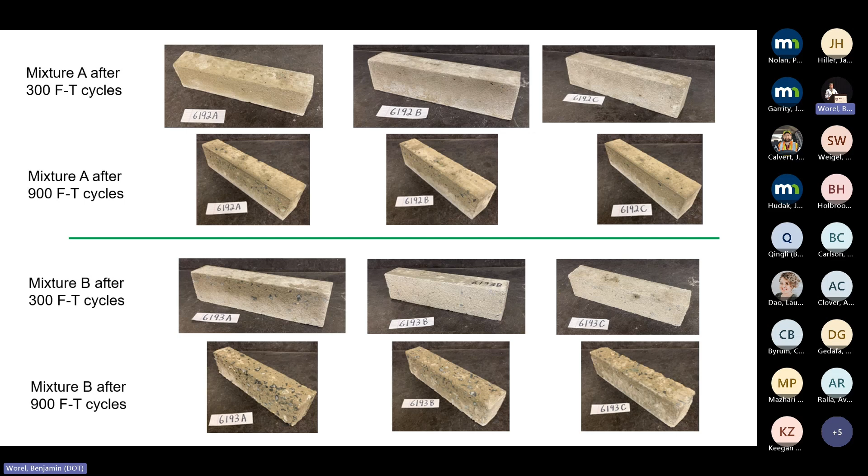Our goal at MnROAD - and Bora yesterday said thank you for investing in this - I'm super excited to see this. Where's a better place to see freeze-thaw damage? Minnesota. Let's take it there. We wanted to observe the performance, see what kind of reductions in cement content we can get, and then quantify the sustainability benefits.

We realize we're essentially opening the market to some ashes that might be available that are marginal or tricky to use, or currently not being used with this product. But also, how can we justify their use if we can actually lower that cementitious materials content?

So we've got 2 mixtures in this round of 2024 installations. We based one on the MnROAD control mixture - we essentially took your Minnesota concrete paving mixture, took out the 6-7% air, and put in 1% by volume microspheres. I'll talk a little about what we did with that extra space in a minute.

We also have one mixture based on Peter's 2022 optimized aggregate packing system that he talked about yesterday, where we reduce the binder. So you have a reduced binder content mixture as well.

We talked to the producer and said, what do you want us to put back in here for that 5% air you don't need anymore? And he said sand, right? Then we tried it and it was harsh as all get out - you're not going to be able to just put sand in there for that extra 5% volume.

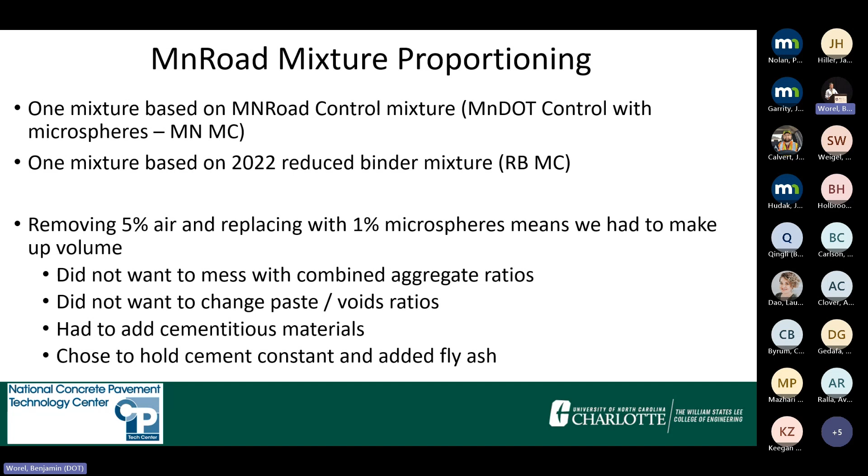We increased our fly ash percent from 30% to 40% in these mixtures to help us with that. We did not mess with the combined aggregate ratios, so essentially our mixtures are comparable to the controls in the sense that the same volume is taken up by those aggregates. We didn't want to mess with the paste and void ratios. We did add the fly ash in there.

Here's our aggregate gradations. We did use a 3 aggregate system. For those familiar with the tarantula curve, our MnROAD mixture with the microspheres essentially matched the MnROAD control, and the reduced binder mixture was pretty close too. So we have an aggregate system that allows our microspheres mixtures to be compared to the mixtures out in the field.

What we ended up with, because we had to come back with some cementitious materials in that 5% space where the air was not, you can see the MnDOT control has 0% microspheres. We have 5 pounds per cubic yard on the other two. We estimated we'd have some entrapped air, so 4 to 7 was what we used in our math. We did use 40% fly ash, but we're still a little bit higher on the binder than we wanted to be.

But we also have room to continue to drop this in our lab, and I'll talk about that a bit. We definitely know we can, because when we look at the paste volume at the bottom, we know we can get somewhere below 25% in most of our paving mixes and still get it through the machine.

So this is now out at MnRoad. The MnDOT design with the microspheres was actually placed first. The weather was sunny and clear, everything went well. One of the things we found out was adequate workability that looked to be our Vkelly measurements indicating good pavability were one thing in the lab.

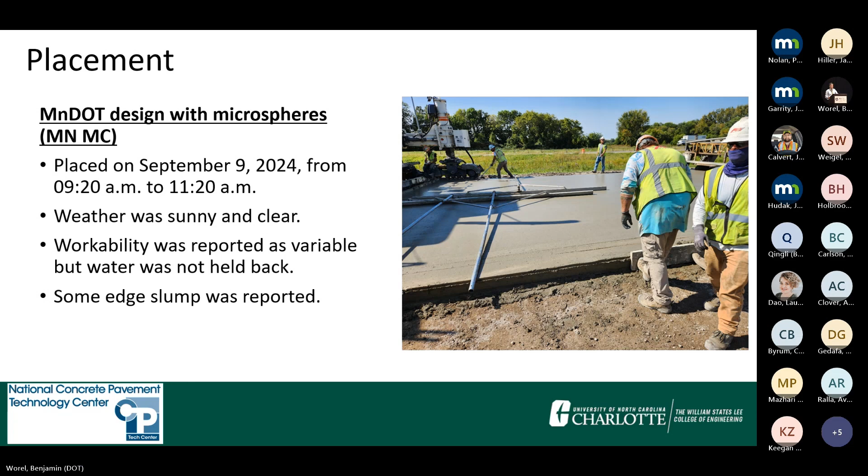That being said, the second one was placed with the reduced binder. That one, next day, same thing — we had room to hold back water, which is actually a really great thing. And they have that in place right now as well. The MnDOT control went in the third day, same thing.

Here's a little bit of the data. You can kind of tell, particularly with our slump measurements, that we had some room where we could have held back water. And if we could hold back water, we could also reduce some more cement content. We have room to improve the mixtures that were there, but there's not a single drop of air entraining admixture in these, and we did get good results.

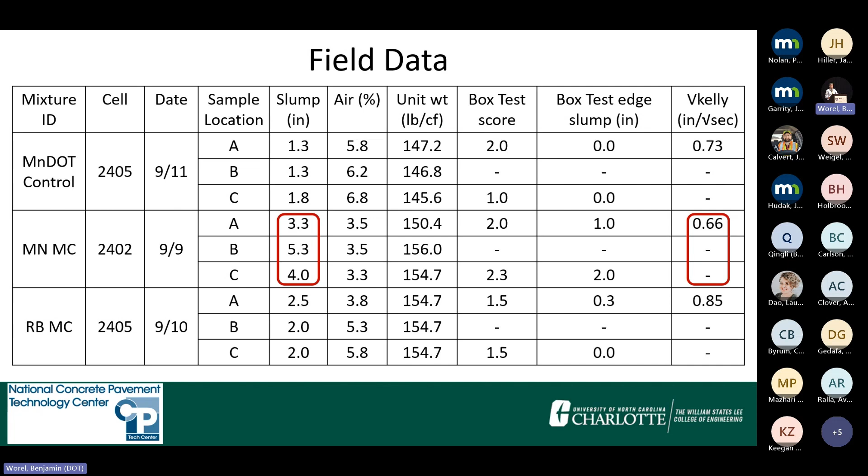How did they do in freeze thaw testing? And here's where I was like, oh, thank goodness, right? You always think you run a tight ship in your lab.

I trust my students, I trust the work we do. But honestly, after running 3 sets of these, they were performing so well, I was like, this is just crazy.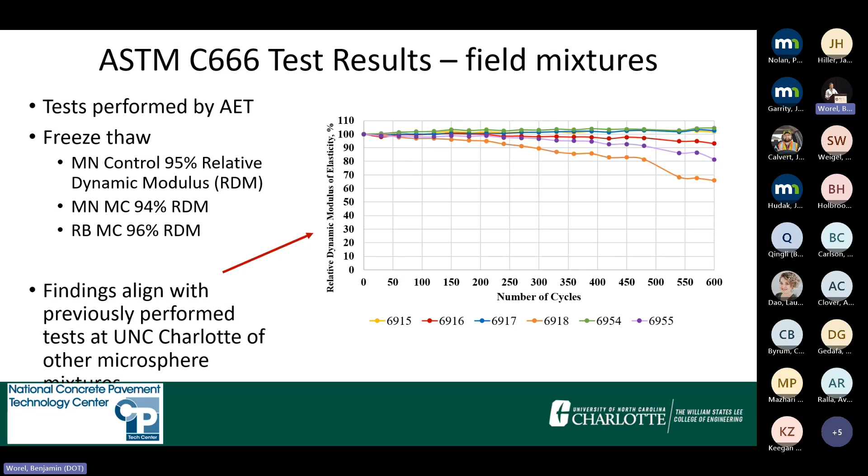But AET ran the tests, and their freeze thaw at 300 cycles was right where we fell. They had, for the MnDOT control, 95% dynamic modulus, and our 2 microsphere mixes, 94 and 96. So essentially, with no air entraining admixture, they were getting the same freeze thaw prediction that we got. Thank goodness, always nice to know that your lab results are not a fluke.

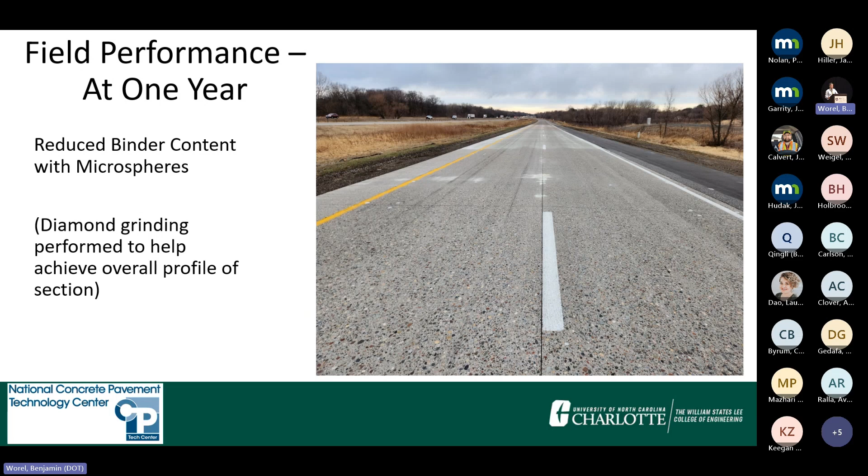They did get out there and do a preliminary 1-year walkover just the other week. There's the mixture with the microspheres looking great. Here's the one with the reduced binder content, looks a little different because they did do some diamond grinding. My understanding was that was not necessarily due to any of the mixture characteristics, but more for the whole surface profile of the section as it sits. But there was no visible signs of distress after this first winter.

Things are going well, so what are we doing moving forward? Clearly, we have room to see how low we can go. So our steps at UNC-Charlotte this summer, we are now essentially dropping our cementitious materials content. We are trying to get a hold of some fly ash with a high carbon content to add to our mixture testing. And then our new testing, we're adding some of the durability tests that haven't been done before: scaling, salt ponding, water absorption, bulk diffusion, and some shrinkage.

So this is what the grad student will be working on this summer, kind of under another scope of work that should complement this and give us some more confidence in how this performs and a better understanding.

So many thanks to everybody that's allowed us to get to this point, especially the students that dealt with 600 and 900 cycles of freeze thaw testing over anywhere from 6 to 9 months. Our project panel has been super helpful, and this has been a great experience. We're looking forward to seeing how it goes. And I really look forward to seeing, once we figure out exactly how much cementitious material we can pull out of this, doing some of the LCA and some other sustainability analyses.

It's great, we could open up an entire realm of fly ash that's been undesirable for a while with this tool in the toolbox. But let's really see what else we can do by dropping our cementitious materials and capture that savings as well, see where this could potentially lead. So thank you so much, that's all I've got.

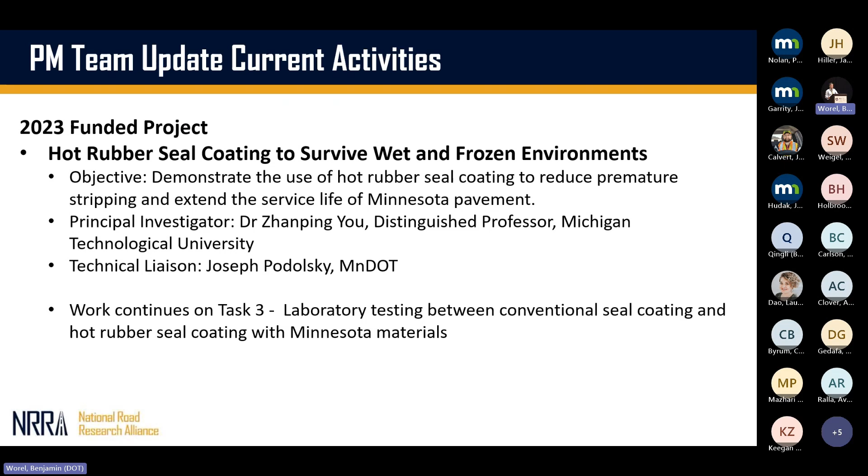I'm hoping to get another one done. So if anyone from any of the states wants to come out and see a hot rubber seal coat be placed, let me know. Dr. You's outfit is working on task 3, and I think we're well on our way. So hopefully that's correct. I see you nodding. So that project's going well.

You're going to hear from Dan in a minute, so I won't steal any of his thunder. But the materials-based methods to improve rumble strip durability study has gone very, very smooth. We actually had 3 test locations in Wisconsin that Dan had already set up prior to the project even kicking off. So things have just been really rolling. He recently completed task 4, which was some interesting lab evaluation and testing. Ran into a few hiccups there.

I think Dan maybe will touch on that, some of the oven aging, but we got through it. And I think task 5, as far as I'm aware, is coming out end of April. So that project's actually gonna be wrapping somewhat soon. So kudos to that team.

Unfortunately, Adriana couldn't be here today, but the recycled materials research is continuing. Emil's the technical liaison on that one. We've gone through task 1 and 2, so we've developed the experimental plan. There was a bit of a hiccup acquiring laboratory equipment. I see Emil nodding, so that's hopefully correct.

We've had a bit of a delay on that job, just because, as I'm finding, the more I get into this industry over the years, it's hard to find equipment for such a specialized industry, especially preventive maintenance. So when there's delays, it's not really surprising, but we're getting set up for that. And I think we're extended out to February 2026 for that one. So more to come.

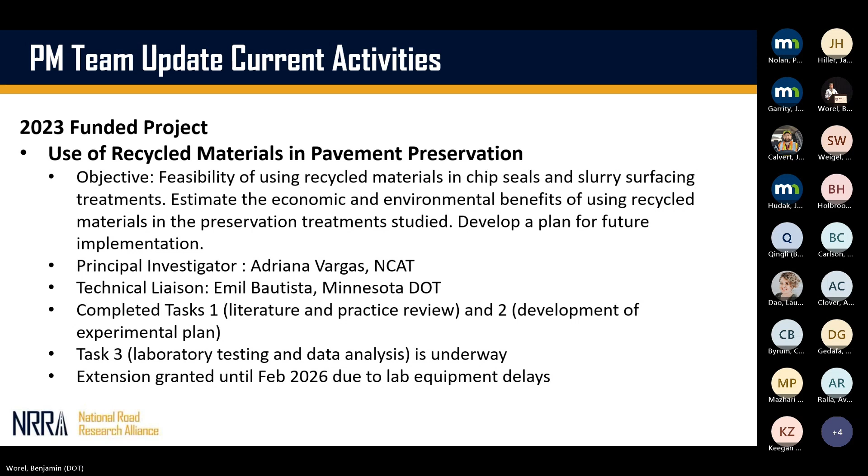So those are our 3 2023 funded projects. A few other chairs have talked about the additional funding. The PM team met back in March, and Lauren was kind enough to provide a poll for me. We came up with 8 research ideas for that, and full disclosure, the Utah High Mod actually rose to the top, but just below it, one vote below it, was the spray-on rejuvenator test section extension. So as the team chair, I kind of made the call that I wanted to go with that co-funded extension with the Flex team.

I think there's a lot of value there. It's not that there isn't value with the Utah High Mod, I just think there's other research opportunities for that treatment. Unfortunately, I should have put the list in here, but we had great research ideas, a lot of interesting ideas on plow skid wear, and I'm gonna forget, but there was just a cool idea. So I appreciate the team, agency members and associate members for providing all those neat ideas. I'm maintaining that list of research ideas, so we'll continue that in the future. But for now, we're gonna extend the spray-on rejuvenator test section to year 3 and beyond. I think that's going to provide a lot of useful data.

I just want to put a plug for our team meetings. We do meet monthly, and then we do quarterly joint team meetings. I'm sure everyone in the room is aware, if there's any topics you want to discuss that are not related to our ongoing research, but you think it's just a cool idea, as Michael has said, we're a bunch of pavement nerds. We get together, and I think it's a great opportunity to just kick ideas around. It can be related to other organizations, NCPP, or some of the stuff NCAT's doing specifically. Anything you want to talk about, please bring that. We've had pretty decent attendance at the meetings, and if there's anything I can do to make it better, let me know, is basically what I'm saying.

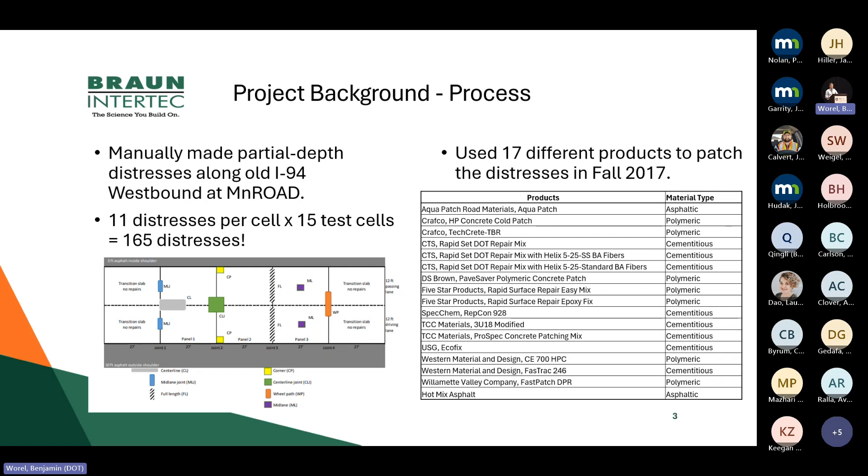There were 17 different products used to patch these distresses. One was just your typical HMA patch, and then there were 16 different proprietary products used. So that's what's listed there, and what type of material each one is. That very first one, Aqua Patch, was the only other asphalt type of material. The rest were either polymeric or cementitious material.

The patches were installed in 2017, fall of 2017. Then we went back each year after that, from 2018 through 2020, and did an annual condition review of those patches just to see how they're performing.

A 0 means that the patch has failed. We originally defined that as just saying the original patch no longer exists. After going out there in fall of '24, I had to redefine that failed. So I included that the patch has been 100% covered by another product, because at that point, I don't know if the patch is still in there or not - it's been covered up, so I couldn't tell you if the original material is still there or not.

So these were some of the assumptions we had to make. Based on that rating scale, the 0 to 4 rating scale, we assumed a terminal service rating of 1.5. So once a patch is at a rating of 1.5, it's probably going to get replaced. And we wanted to define what is a long-lasting patch. A typical HMA patch is expected to last about 2 years, so we wanted a long-lasting patch to last at least 3 years.

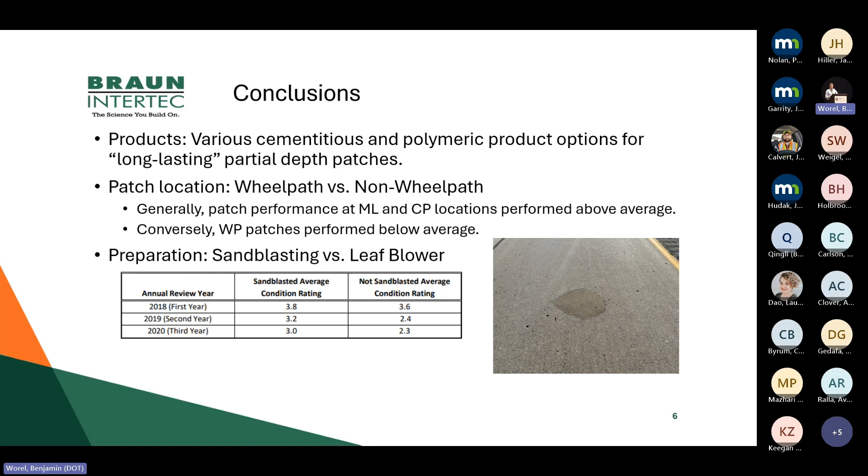Okay, so fall 2024 update. I went back out there last fall with some of the MnDOT staff and took one last look at the patches before they were ripped up. At that point, the patches would be almost exactly 7 years old. I think we went out there at the very end of October.

And just reviewing that data, the conditions still confirm those conclusions from the final report: the sandblasting versus not sandblasting, and the location of the patches, with the mid lane ones performing better than the wheel path, obviously.

All this to say, this is a rumble strip durability project studying centerline rumble strips ground into, or milled into, new asphalt pavements. So give you a peek behind the curtain, if you want. Tyler did say that we're on task 5, which is the last task for this project. One of the promised deliverables, aside from a 200-page final report with a million charts and data points and everything, was sort of a best practices guide, if you want.

And I think the way we've kind of evolved over this project, what we decided to do was produce — and I apologize for those listening online, but one of the advantages of being here is not only seeing me, but seeing what I'm holding up — we've produced a single page, one-sided summary of the project. There's a QR code to the different project reports and so forth on it. So all of the data and everything is easily accessible, but it's something that you can take and distill a lot of information onto one page.

So I put a number of copies on each of these front tables. By all means, take one. The research team is confident enough in where we're at in our research timeline that I think this is as final as it's gonna get. But if there is any input on the format or anything, let me know. Right now they're sort of NRRA branded, but that's kind of less important.

So I think I wanted to start here and pull — this is the top half of the document. It's really the impetus for the project. Why did we set out to do this?

I think MnDOT, in our literature review, sometime in the late 2000s, maybe 2008 or so, did publish a report about centerline rumble strip durability. A number of other states have done this as well. And I think it was safe to say at the time when we proposed this project that the jury was sort of out on whether these things actually were a detriment to pavement performance. We know there's safety enhancing benefits — there's no arguing with that. It's a matter of, are we hamstringing ourselves by milling these into a pavement?

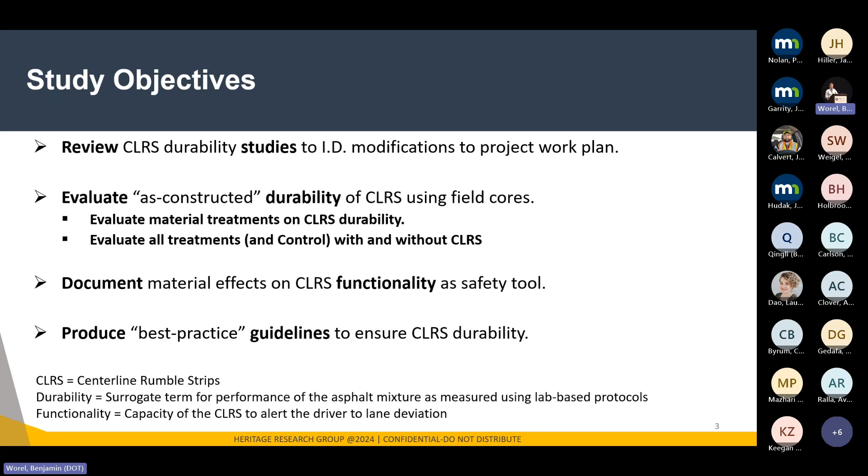I promised myself I'd get the word sinusoidal in this presentation. One of the projects was sinusoidal. The other two were what WisDOT calls standard geometry, which are paired corrugations. Sinusoidal just makes me sound smarter than I am, I use it whenever I can. Probably little relevance to this group.

All this to say, the project is pretty well wrapped, even though it was an 18-month timeline from initiation. But what's of relevance to this group, rather than bore you, especially if you're not on the asphalt side of things, Lauren's been great helping us get all of our task reports uploaded in the right spot. On the project webpage that the QR code will take you to, underneath the individual tasks are summaries of each task. And at the very bottom, a thank you to our TAP members, is the standalone functionality report, the report the contractor generated for us, kind of unedited. So anything you could need from this project is on that website, the NRRA page.

But I would be remiss if I didn't spend some time looking at charts and talking about data, given the crowd we've gathered here. So this is a busy slide, but we're going to take our time and walk through it. I don't know if I have a pointer. Maybe I do have a pointer. That would be tremendous, but I don't think I do. That's just a prop. No, that's okay, we'll go through it this way.

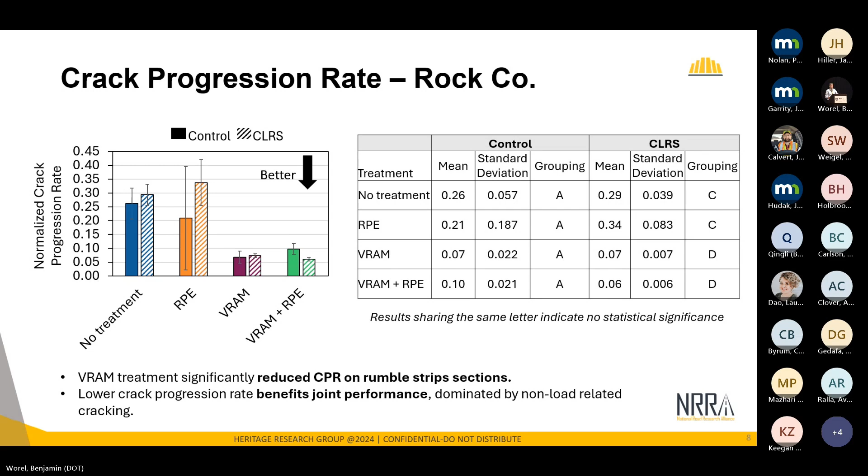The bottom half of this handout, we thought it would be kind of provocative, doing it as a fact-or-fiction format, ask a question, answer the question, based around the objectives of the project. We've got questions and answers listed here, but the key findings are to follow.

Effectively, what we found is that milling of rumble strips in a brand new asphalt pavement didn't cause aggregate degradation at the joint. When we measured gradation, it was the same whether you milled rumble strips or not. Interesting - milling of the rumble strips did not increase permeability. The 3 fine graded projects we built would not have been considered permeable based on conventional limits, like 100 or 125, 10 to the minus 5 units - I'm referring to the Florida method, where it's tested in a little case in the lab. So baseline, none of them were that permeable, they'd be considered impermeable. Milling the rumble strips didn't make them permeable. These treatments further lowered permeability, but to say I made an impermeable mix more impermeable, you have to decide the value in that.

Cracking susceptibility - the number one takeaway we would present to agencies, and have in our meetings, is that this study really highlighted that to get a good joint, you need to construct a good joint. Rumble strips are not the boogeyman of the joint, poor construction practice is the boogeyman of the joint. If you mill rumble strips into a bad joint, rumble strips are going to cause a problem, but that joint would have been a problem anyway. So build a good joint, mill rumble strips, and you're likely going to be in pretty good shape.

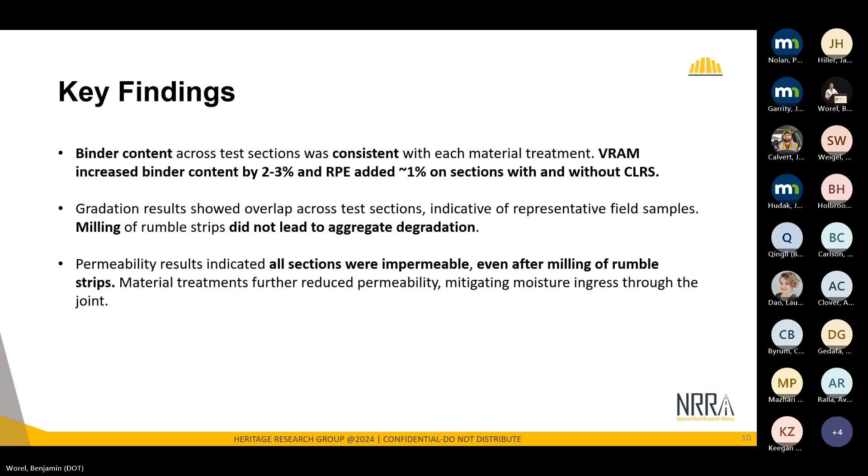That's shown here. I didn't show any Ideal-CT results, but you can dig through the report and certainly find me after if you're interested. One of the issues we have with the Ideal-CT is testing over a joint. You can imagine, for those who have run that test, it's an indirect tensile test of a core, and we line the joint up with the loading head. The joint is this massive discontinuity in the mix, right? The dynamics of loading an indirect tensile right at that point are complex, to say the least.

That test suffers from variability in sample production to begin with, let alone introducing a joint. What we found is the presence of the joint during that test just overwhelmed it. So even when we deconstructed the test and asked, what about peak load, what about post-peak slope, what about energy—in other words, area under the curve—there was no real good indicator of 'I got it.' It was just the incorrect test to be using. But nevertheless, it's a fast test, it's one that's being implemented, so we chose to include it. What we found is that the joint behavior really just governed that test.

Again, we can't stress enough what we learned: a high quality joint is of the utmost importance. These treatments can help, but they're not a safety net. Think of them as insurance—maybe that's the best way to put it—they can help prolong life, but they're not going to create life that's not already there.

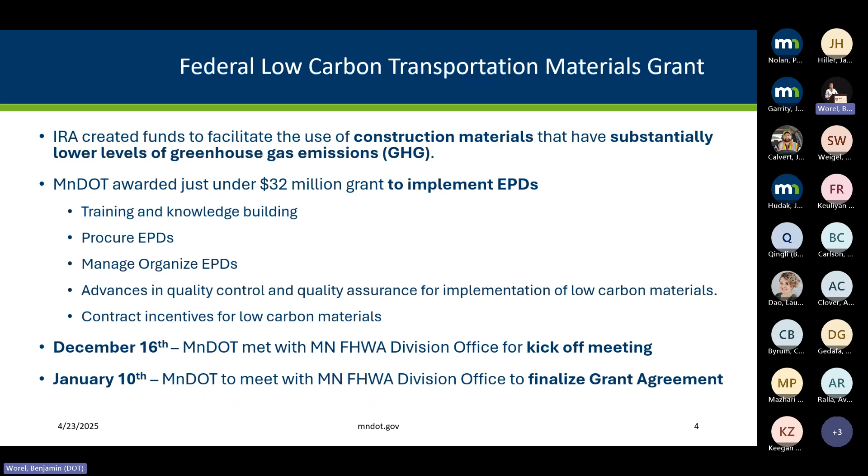We met with FHWA division on December 16. Everything was looking well, we had the document pretty much ready. They made some comments to correct. We corrected them, and met again on January 10th. But from January 10th to January 20th, this came out.

I'm not expecting anybody to read it, but it's an executive order that terminated the Green New Deal. Some people have told me the Green New Deal doesn't exist - I have no clue of that. What's very important is this asked all agencies to immediately pause any funds appropriation through IRA or IIJA, which the funds for the LCTM were from IRA, if I'm not mistaken. And what they asked was that the head of the agency pause this within 90 days.

They will submit a report with details of the findings of this review, including recommendations to enhance their alignment with their policy in Section 2, which is above Section 7. But by the time you get to Section 7, you forget exactly what Section 2 had.

And they had a lot of language on electric vehicles. They seem to have some issues with that. And that's what you could read there. There wasn't anything related to materials or anything like that.

For the meantime, federally, we got stopped, we got paused. But in MnDOT at Minnesota, we do have legislation. We have a state mandate requiring us to collect information on the environmental impacts of materials. We have goals, and we also have an environmental task force created to provide recommendations to the commissioner to implement this program by January 15, 2028.

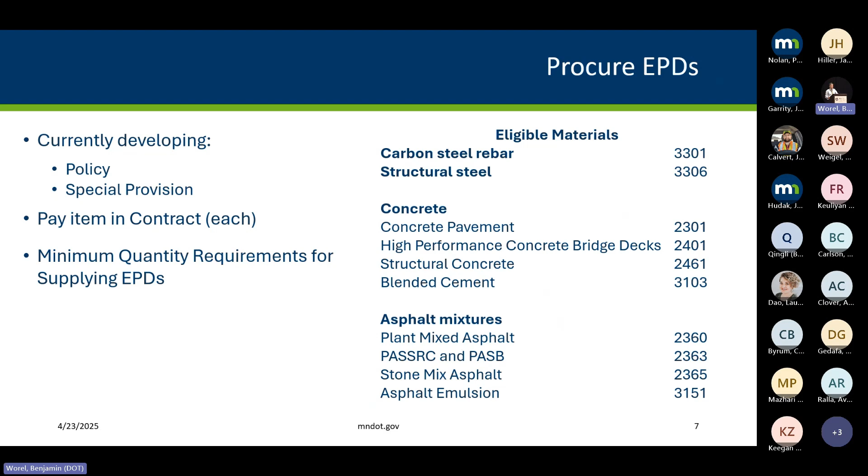Then the other part is organizing this. There's a lot of effort that was started to come up with this thought of money coming, which I think now that the money went away, at least for now, it's paused. This conversation kind of stopped, and only a few DOTs were able to get this money awarded and have this type of conversation. But we are looking at what type of database.

We know industry has some concerns about sharing proprietary data, so we're looking at all of these things. And also, I think Rebecca mentioned yesterday about beta and having a space to collect EPD information as well. So that's where we are in the state.

As I started looking at people here and talking to people here, I had the chance to talk to a few DOTs, and I'm actually wanting them to share some of their thoughts and where they are at. I had the chance to talk to Mike, he's the first one here. So can you share with us where your DOT is at? You are Idaho, you guys did apply.

Okay, Eric, we talked a little bit too with Wisconsin DOT. You guys were one of the few DOTs, I think out of five DOTs that got the funding. What I have seen from other DOTs is they are very scared to spend the money, and the ones that have spent it have spent very little just to make sure that they can get that little back. Would you explain where Wisconsin is at?